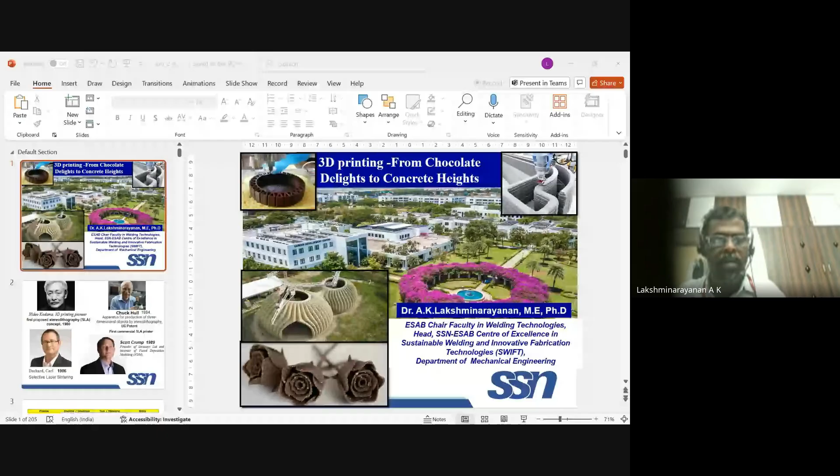Is it visible to you? Or are the slides visible to you? Yes, sir. One second. Is it moving? Are you able to see my slide moving? No sir, it's not moving. One second, I'll just check. See, slide 1. One second, I will just stop sharing it.

Is it moving now? Yes, sir. Thank you.

Though the topic given to me is metal printing, since I am covering another session, before that introduction session, I would like to share an overview.

This general overview includes the 7 different processes of additive manufacturing. This is our campus, SSN College of Engineering. Currently, I am the chair faculty in welding technology, sponsored by ESAB India Limited. I am also heading the center, which was established recently with funding from SSN and ESAB, called Center of Excellence in Sustainable Welding and Innovative Fabrication Technology. So currently I'm heading the center.

We are doing a lot of work with respect to conventional welding processes, process development and consumable development, as well as wire arc additive manufacturing, especially twin wire additive manufacturing, with support from ESAB India Limited, as well as through two different DRDO projects. Maybe in the next session I will share that.

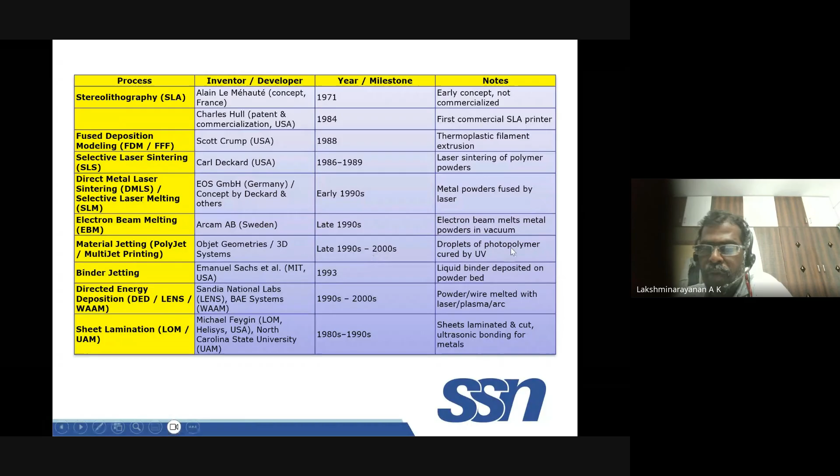Then the process called material jetting was established from the 1990s to 2000, where photopolymers were cured by UV. That is one of the developments. Then binder jetting, in 1993, by researchers from MIT, where liquid binder is poured onto the powder bed to act as a binder.

Later, this process became widely used for metal deposition or metal component fabrication, called directed energy deposition. We are also using one of these processes, WAAM, what we call wire arc additive manufacturing, where either powder or wires are melted and used for deposition. Finally, there is one more process, what we call sheet lamination.

Sheet lamination was also proposed during the 1980s to 1990, but did not come into effect until after 2000. Especially we did some work on laser lamination, which we will see when I cover laser lamination and friction stir additive manufacturing in the next session, probably on the 28th.

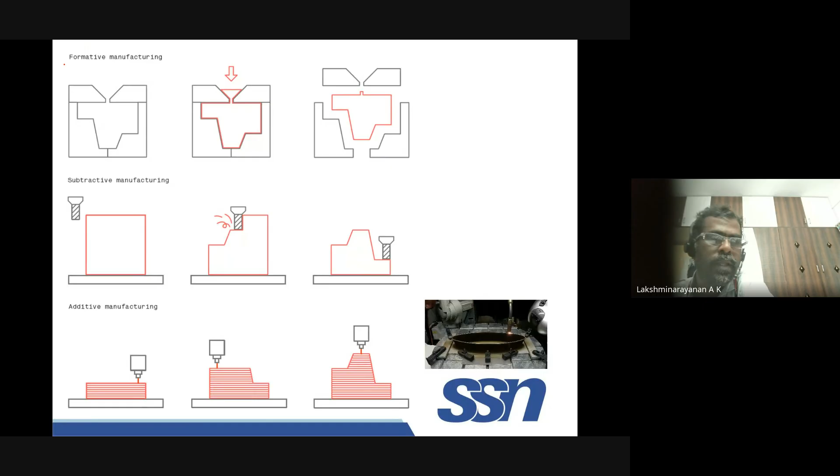Formative is nothing but metal forming operations where you have to prepare a die of the desired shape. Initially the material we have is a billet. Take a billet of certain dimensions, keep it over the die, and apply force from the top. It will go through this process and occupy the position of the die, the space between the die, and finally you get this shape. This is what we call secondary processed material.

Usually any material is fabricated through casting. Casting is the approach through which any primary material is fabricated. So formative is nothing but metal forming operations, a secondary process mostly done to achieve better properties.

Now, if you want to change the dimensions of the product, again you need to prepare the die. That is one of the costly things—the die is one of the costly aspects we suffer in formative manufacturing. Even now, some companies in India—I visited Super Auto Forge—fabricate these dies using additive manufacturing, especially laser-based additive manufacturing, to reduce cost as well as increase the life of the die. They use formative manufacturing for this.

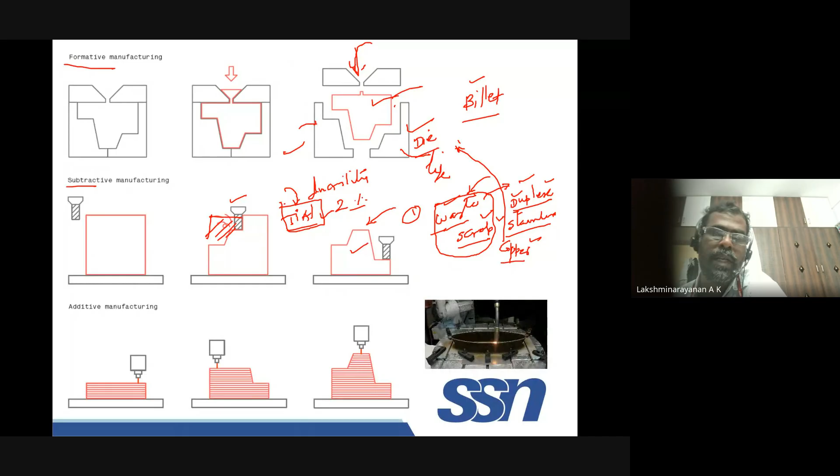So it is not easy to deform, then it is not easy to machine also, because the ductility is very less. For both cases, whether you want to machine, remove certain material, or deform the material, since the ductility is very less, these two are not possible.

So naturally, what we have to do is look for an alternate process. So the alternate process is additive manufacturing.

The other aspect, when you have a very thin section, making from casting further, you have to cut it from the bulk casting, then use secondary processes like rolling, progressive rolling, and finally you end up with a thin sheet. So these difficulties can be overcome by using additive manufacturing.

But remember, additive manufacturing is not the solution for everything. Whenever the need arises, whenever there is a problem with conventional technique, then you can use additive manufacturing. That always you have to keep in mind. Sometimes people doing research on additive manufacturing claim that everything can be done in additive. But even then, you have to see feasibility.

So additive manufacturing is the technique. We'll see more detail. The same thing, what I will do with this sample - from the top you see a square like this at the bottom. So what I will do is try to do a CAD model.

Maybe I will go with the slide and tell you. I will have a 3D model, then I will try to slice that into different layers. Say for example, I will have a first layer, second layer, third layer, fourth layer, fifth layer. Like that, I will just slice this. So if I slice that, I will have one plane here like this.

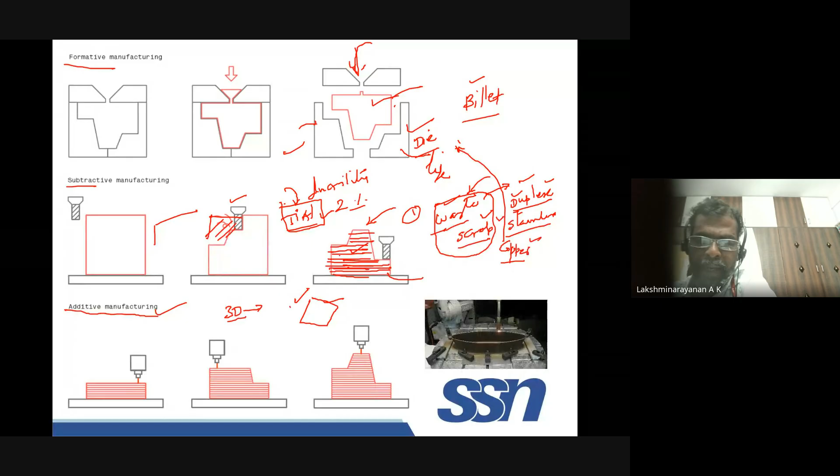Above that, there is another plane, another plane, another plane. So now I slice this three-dimensional object into two-dimensional. Actually this whole process I will do as a single step. For understanding, I'm telling you, slicing is nothing but making this 3D object into a 2D plane.

Then you just split this, make this also, then try to have the coordinates of the particular plane - especially I'm talking about the first layer. It looks like this. When I go here, only this part, right? I will have only this part. When I go here, I will have only this, right?

So I will just slice it, get the coordinates. Finally what I have is the coordinates of everything, each plane, each coordinate. Similarly, multiple layers, multiple planes. Finally what I get is a file called G-code.

This code, you can run using a robot. We have a robot in our center, or we can also use a CNC machine. We also have that. So both machines can be used for depositing material.

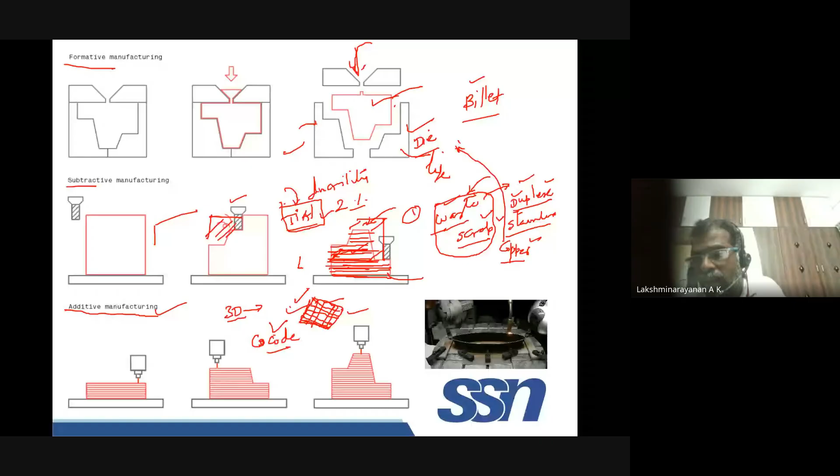I'm not going to cover mostly metal today. I will cover whatever explanation is given, and wherever possible I will bring material into the picture. Mostly I will cover what techniques are available, and when we have to use which technique. That is the idea of this session.

Maybe for the newcomer, or anyone fresh who wants to start with additive - just whatever you are seeing in the video is machining, right? Wait a minute, I will just...

So this is also excess material that can be removed, right? I don't want to play this and take too much of your time because I need to cover other topics. So first, this difference you can see in this picture, where subtractive manufacturing or machining or metal cutting starts with a block of metal, where I will remove certain material to create features.

When I want to have a thread, I can make it, or when I want to make a hole here, onto the surface, I can make it. So I just remove the material, and you see there is a lot of waste material coming out that needs to be taken care of, until the desired part comes out, and you end up with the final product like this.

Whereas additive manufacturing starts with nothing. You have only a substrate plate, or even for polymers where you don't want anything, you just have a build platform that is not a consumable. You just take that platform and start building layer by layer, gradually adding layer by layer. I have a few more slides which will make this very clear, gradually adding layer by layer until you have the desired product.

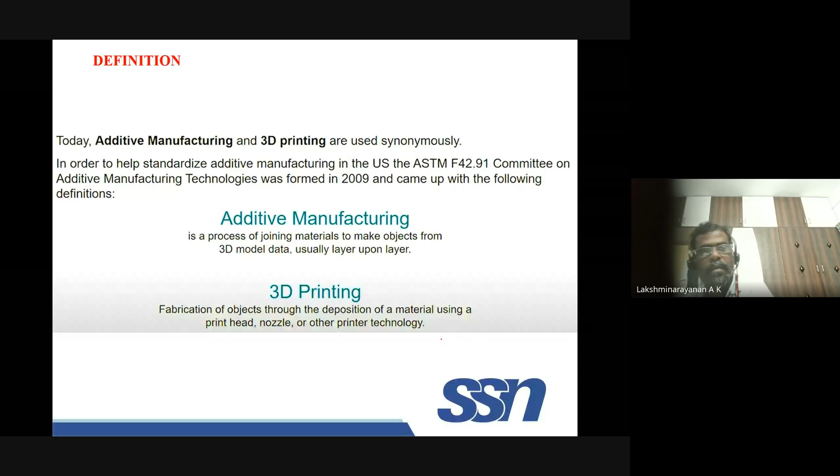So wherever possible, I will give some ideas to extend your research also, probably in the next session. Before going to that, let's look at two different terms which are used interchangeably by many of us: one is additive manufacturing, the other is 3D printing.

So for this topic, whatever I am presenting, in some places I use additive manufacturing, but 3D printing is a very colloquial term people use. Technically, from the industry or manufacturing process point of view, additive manufacturing is the proper term we have to use, because it compares with conventional processes like subtractive manufacturing or formative manufacturing.

This is the definition given by the committee ASTM F42 91 during the year 2009. They defined additive manufacturing as a process of joining materials to make a component from 3D model data, usually layer by layer.

This holds good for 3D printing also, but 3D printing is a very general term which covers many processes, for example fabrication of an object through deposition of material using a print head, nozzle, or other printer technology. So that's a very general term, but additive manufacturing is the more technical term which we may use.

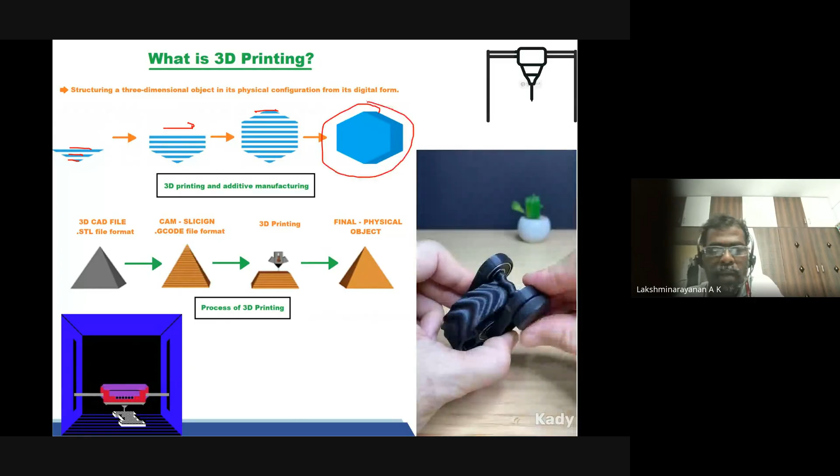As I mentioned already, it takes digital input in the form of a CAD model to create a three-dimensional part layer by layer. We will see where we have to get this from. Once you have the 3D model, once you have the G code, the process is like this: deposit layer by layer. These are the in-between steps you have, and finally what you need is the data, the G code.

You can also visualize the features of FDM—maybe I will cover that. I have a few more videos for you just to understand the capability of 3D printing. So initially we need to have a 3D model.

Then you just do slicing—maybe there is a spelling mistake there. You will end up with the G code format, and then you do 3D printing. Once the G code is ready, just transfer it to the machine through Wi-Fi or through a memory card, and then you have to do certain settings, such as whether you want support, what shape of filling, whether you want 100% fill or 50% fill, things like that. Then you do the settings and run the 3D printer. Finally you will get a finished project.

Those who are at the initial stage, I recommend you go buy a 3D printer. An FDM printer for polymers will cost only around 20,000 rupees. We spend a lot of money even for phones, so it will cost only 20,000 rupees, and you can buy one and learn by making plenty of models, which I'm going to show now.

So what we need initially is a 3D model. How can you get a 3D model? If you're starting with it as a hobby, you can explore the website Thingiverse, where you can get models—whatever model you type in, you will find very beautiful models that people have already made.

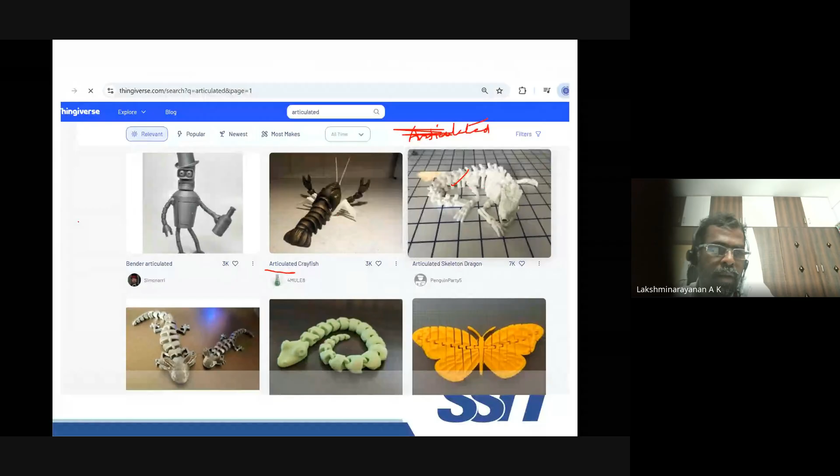Suppose I want to make an element chain, like a chain. What I have to do conventionally, if I want to do manufacturing as metal or plastic - take a metal. If I want to make a chain of stainless steel, I have to take a bulk material, extrude it, and make it into a very thin section of wire.

Then from the wire I have to do some metal forming to bend it, then I have to do some welding. That is how usually, if you want to fabricate a chain, you can do that. But in 3D printing, if you use this feature, this consists of a lot of links, and that link can be directly printed without any problem.

All this I have done a lot of work on - even in front of me I have two 3D printers at my home, which I bought for a hobby. So this kind of link, if you want to generate, what we call it is print in place. I will show you some videos for that - print in place. Directly you can print if you have this.

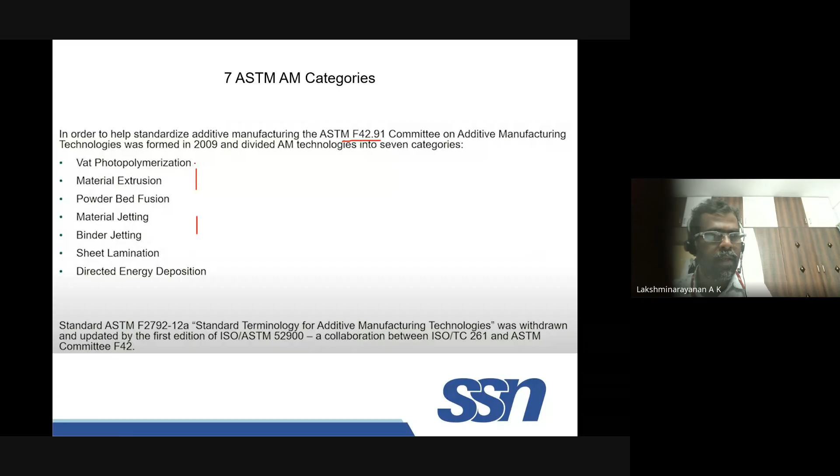Number 1 is Vat photopolymerization, which is a resin based printer. Material extrusion is basically where you can use wires or pellets, even paste that can be extruded through a nozzle. Then powder bed fusion is very popular, which uses powder and tries to melt it with a laser source or electron beam source. That is one process, and you can use this for metal.

Material jetting is also one of the processes, where material in the form of droplets comes out from the nozzle. That is one process. Binder jetting is where you use binder particles.

You have a lot of powders where the powder binder will be sprayed in between to create bonding.

Sheet lamination is nothing but taking different sheets, instead of powder or wire, and trying to bond them, because when you use powder or wire, it takes a lot of time to deposit.

Directed energy deposition - I will go deeper when I show a video. Directed energy deposition is nothing but using a laser source, or electron beam, or an arc. I will cover arc processes in the next session. What I do is place the wire in the arc column, laser beam, or electron beam and try to melt it, then deposit onto the substrate. It may be wire, or coaxially I can feed the powder to deposit. This is called directed energy deposition.

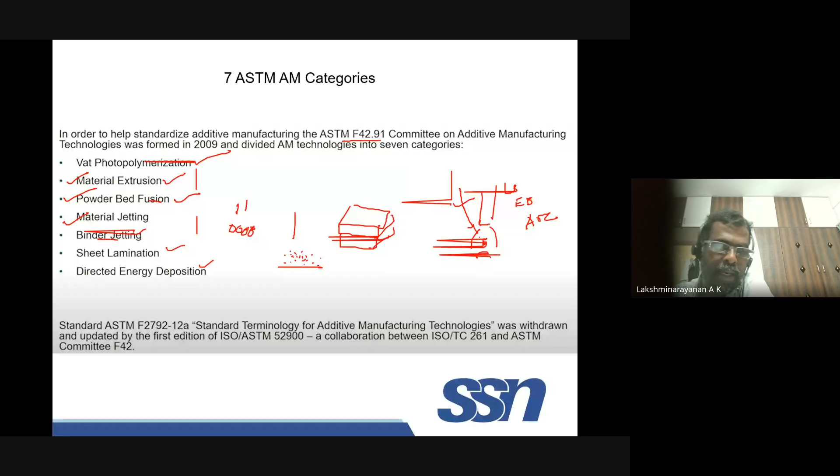Why is it called directed energy? Because in powder bed fusion, you keep the powders at the bottom to build a flat form, just using laser to melt. Whereas in directed energy deposition, you are directly feeding the raw material into the heat source. That is why it is named so.

So if you see the 7 categories, there are still a lot of subclasses. For example, in Vat photopolymerization, you have SLA, stereolithography, where you use a laser.

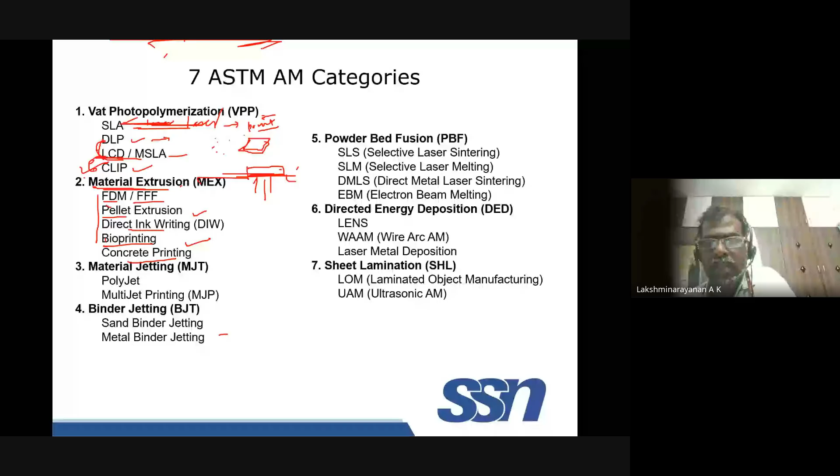Laminated object manufacturing just uses adhesives to stack layers to achieve the component. That is LOM. Ultrasonic is used for very thin sections - same concept, take sheets, use ultrasonic transducers to create vibration so friction is generated and used for bonding. One method missed here is friction stir additive manufacturing, which we worked on in our center, studying creep.

So this is the first material, extrusion. Each category has certain characteristics we call resolution. Resolution is basically that after deposition, if you expect the surface to look a certain way, it won't be exactly like that - you will always have some variation. So this resolution is very important.

In case of material extrusion, you will achieve 100 to 400 microns resolution based on the nozzle diameter. So this is low cost.

Maybe I will just play this video. So it's like a hot glue gun - it will just deposit. Basically it is low cost, and it works well with thermoplastics, composites, concrete, and biomaterials.

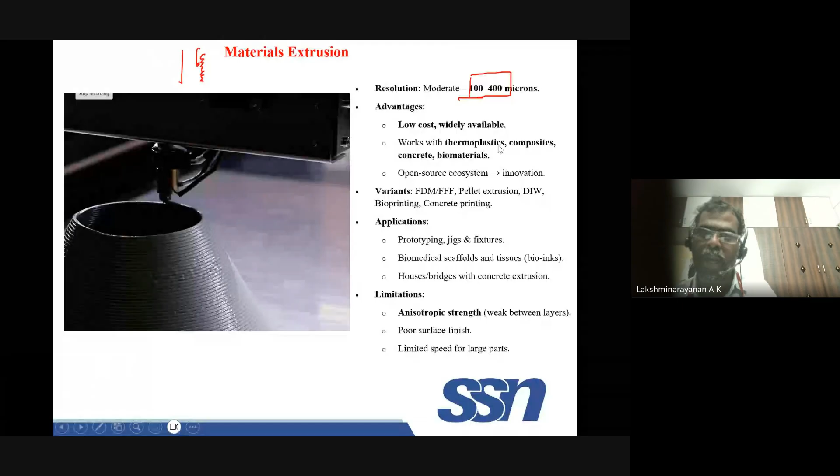A lot of open source systems are available. You can develop your own system, because basically all these 3D printers used for plastics use either Marlin software or Cura. There is software called Cura, and Marlin is open access - you can just download it and create your own systems.

I'll stop this video. So if you see the variants I already shared with you - application prototyping, if you want to do some projects or develop prototypes, you can do it using this process. There are many biomedical applications; even tissue manufacturing, people are trying, though it's not commercially available - at research level they have gone to a certain extent.

The only issue is that whatever material you deposit has anisotropy with respect to the build direction, so the properties may be different. The surface finish depends on the nozzle diameter - conventional polymer printers mostly use 0.4 mm, so the surface finish is not as good compared to the SLA process.

So for larger parts, larger speed is difficult to achieve. Nowadays, with Cura software and some modified versions available, printers are going for higher speeds.

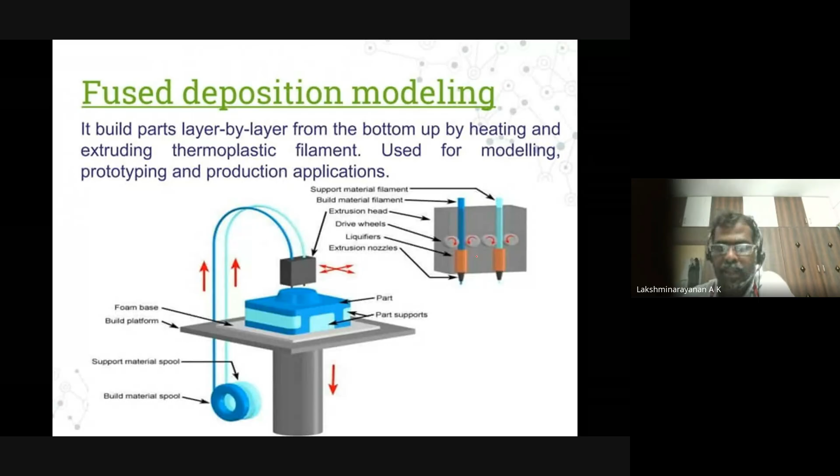So this is one of the methods, fused deposition modeling. You can have a single head or multi head. You can just pass the wire and deposit based on the technique I described - you start with a single layer.

Two things you can notice here are the movements. Most of the time the Z axis is controlled in the nozzle - the nozzle will move only in this direction or that direction, whereas the bed can move in both directions. In conventional printers, plastic or polymer printers, the nozzle will go up and down too. Usually the Y axis moves the bed, while the nozzle's X and Z axes are controlled.

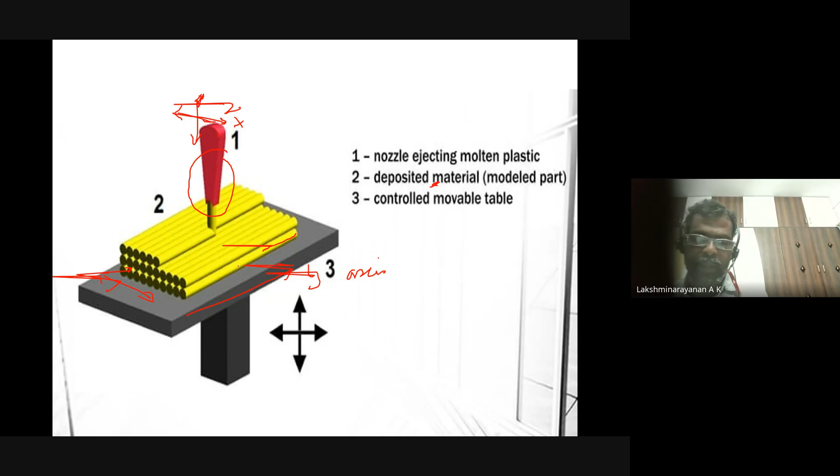So basically, if your first layer consists of this rectangle, it will deposit like this - you can see some gap is there, which will affect the structure. So you can see what are the possible ways, possible models you can print.

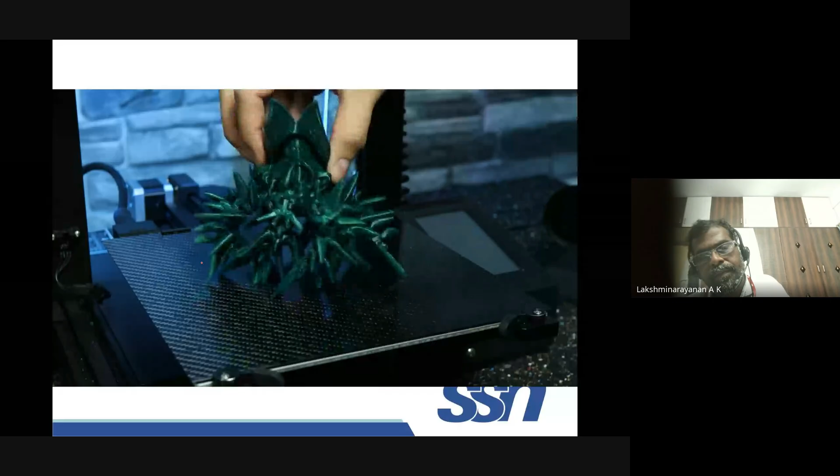So they print in place. Sometimes you can print and assemble also, like what is being shown here. Depending upon the size, the time will be different - you can imagine the ways by which you can print it. Here the body and limbs are printed separately, then they will assemble. That is also possible - accordingly, you have to design.

Even these models are available in open source - you can just download them. According to your printer settings, you have to modify the setup and just print it.

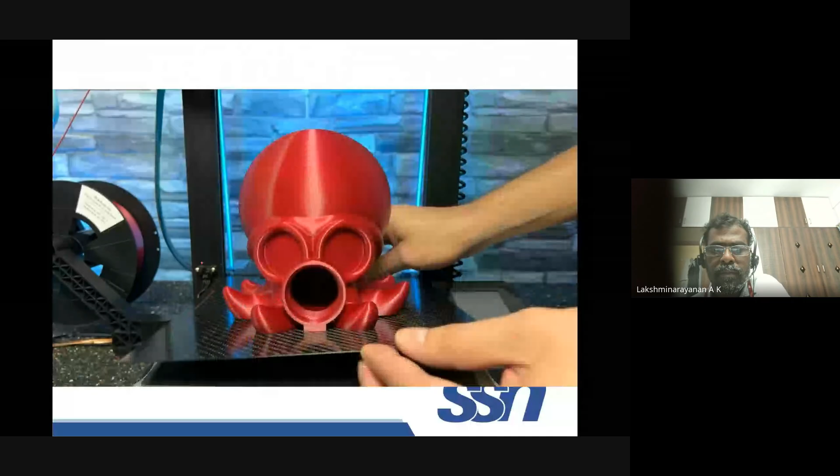So with multiple heads, it is still possible to print. You can just print with multiple heads. See how nicely the horizontal hole comes out with even threads - nowadays modeling threads and such is easy. This way you can get multiple colors if you want, or you need not have multiple headers - instead print with different dimensions.

You change the wires and then assemble it.

So all are link-based. You can do a lot of butterfly or whatever. Even for our prototyping, you can just do that.

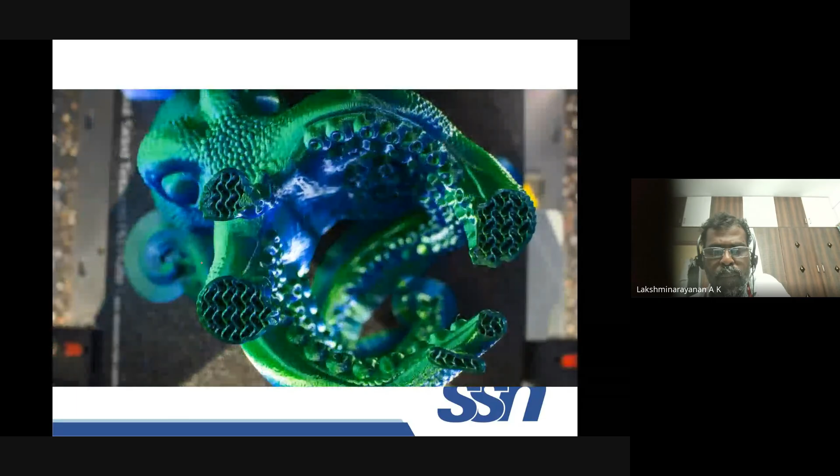So these are some of the models just for the capability. I just want to show the capability.

Sometimes you need to do post processing, like polishing it. You can give different colors also through painting.

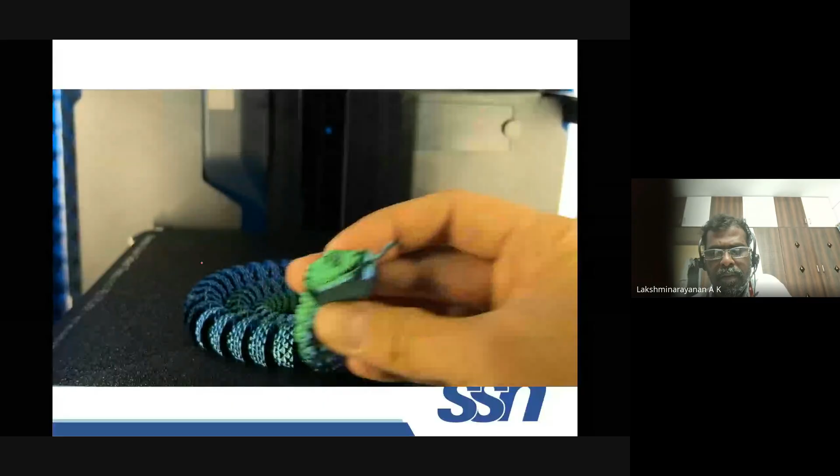Right, so that is regarding FDM. I witnessed, I hope different components can be done by using a wire.

Then this process is a resin-based process where you just cure the resin. You have a building plate with resin filled in, from the bottom. Either it is an LCD screen, DLP printer or CLIP, all use the same concept. There is only a certain difference among them. So you have a build plate where at the bottom you have resin.

Through the lens, I will send the UV light so that the first layer cures. I will maintain a gap, this initial gap is what we call layer thickness. So once I keep this plate at the bottom, initially I will keep a certain layer thickness, then I will cure this.

One layer is over, for the next layer just move the platform up. Then the next layer, you can see the second layer cured. Like that it will go.

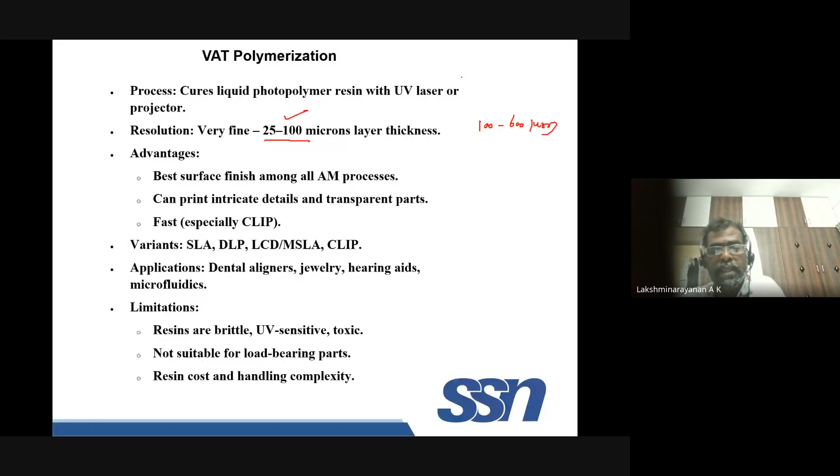But a few points, only very fine microns. As I mentioned, FDM starts from 100 to maybe 600 microns, whereas here the resolution is better because it is based on resin. That means resolution is fine, meaning you will have very small features in your product. That is the advantage of this process.

You can see it has the best surface finish. It will provide the best surface among all AM processes. You can have very intricate details, transparent parts you can make, and it is very very fast, especially the last one, CLIP, because there is a special technique.

You have a lot of applications which I will cover very soon. So these are the trade names for that, which we already discussed.

Basically these three are very common: SLA, DLP. Recently CLIP is also one of the processes. Only the source is different.

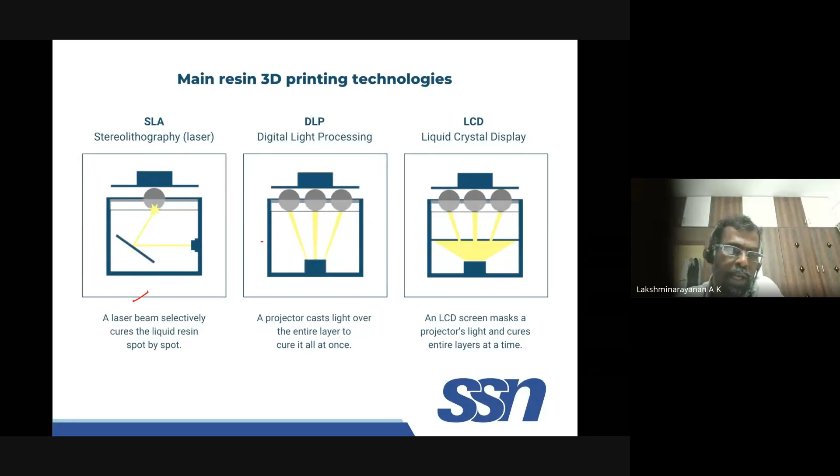If you see the first one, here we use laser that selectively cures the resin. It will take a lot of time. That is why this comes into picture, where the entire layer is being cured all at once. Laser LCD helps us to control the system better, and hence you will make it slightly faster than DLP.

So these are the systems available in the market. Basically different manufacturers are there. Anycubic or Elegoo or Prusa. Creality is also very popular.

The cost - earlier they had a version LH or LD002. Now there is a system called Halot. You can buy it for 16,000 rupees or 17,000 rupees. So basically the concept is very simple.

You have to prepare the resin. You have to just pour it in the container, what we call the vat. That is why it is called vat polymerization, the process name itself is vat in general. This container, the vat, you have to pour it, then bring it to the first layer, cure it from the bottom. The source may be different - maybe you have a laser source or LCD or whatever source you use.

The same concept is there. Before going to the video, let me share two things. There are two ways you can deposit material or build your component. Whatever I showed up to now is this system, where your build platform is initially at the top.

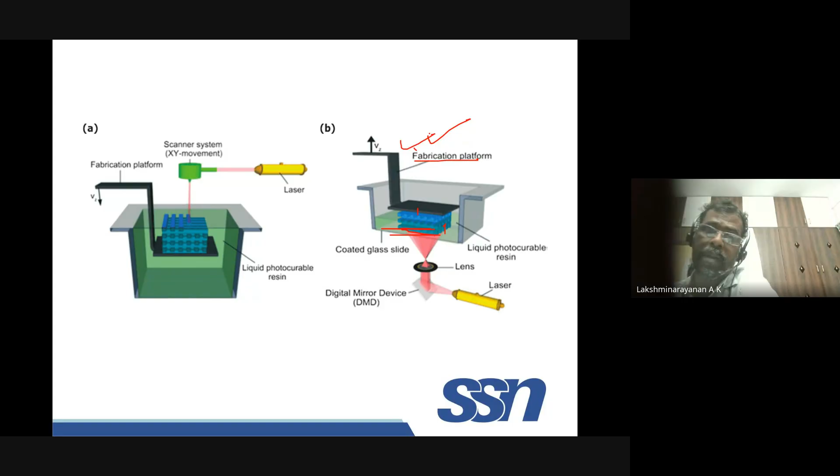There is another system also. Here the build platform is at the top. You pour the resin so that the space from the top to the build platform matches the layer thickness. Initially, from the top, you start curing. The first layer is cured, then it goes inside. After that, it moves down with respect to the layer thickness, and the next layer, third layer, fourth layer comes. So it will be immersed continuously in the resin, and finally it will be taken out.

Okay, this is one method. So either you can go bottom-up or top-down. But basically, most commercially available machines use this approach. Both systems are there, so let me just play this video.

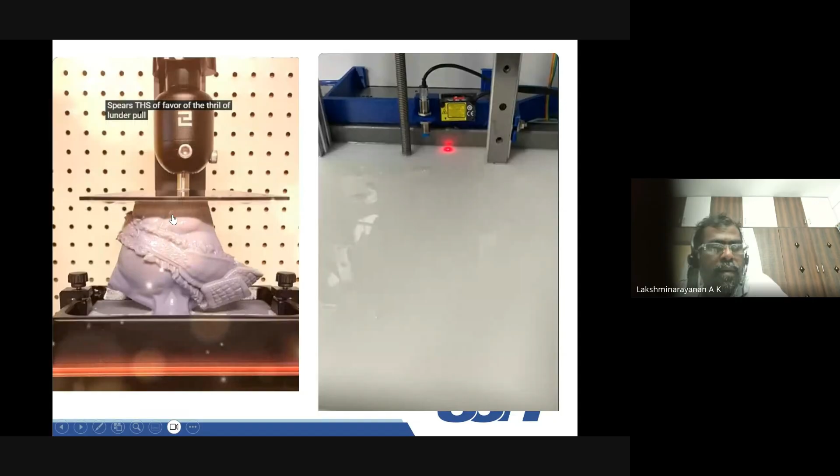You can see the very fine feature and surface finish of the component. That is much better compared with FDM. So let me show this also.

This is from the top.

The next process we will see is selective laser sintering, which usually uses a CO2 laser to fuse small particles - it may be plastic, metal, ceramic, or glass powder, whatever it may be. So you have to spread the powder and try to melt it with respect to your model and according to the coordinates.

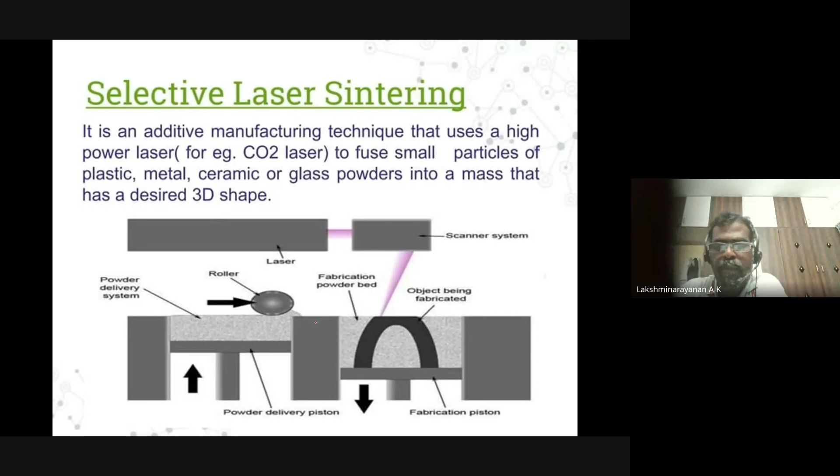Then your first layer is formed, and the fabrication piston will go down. Let me get a better picture to show you very soon - this is how it works. So powder leveling will be done first, then laser melting, then your platform will go down. Let me show one more slide for a better picturization.

Usually laser or e-beam, meaning electron beam, works layer by layer. The resolution here is 20 to 100 microns. This is another advantage - the biggest advantage is you can have a fully dense component, very strong. That is also one of the advantages of laser sintering. Metal, polymer, ceramic - you can do all variants.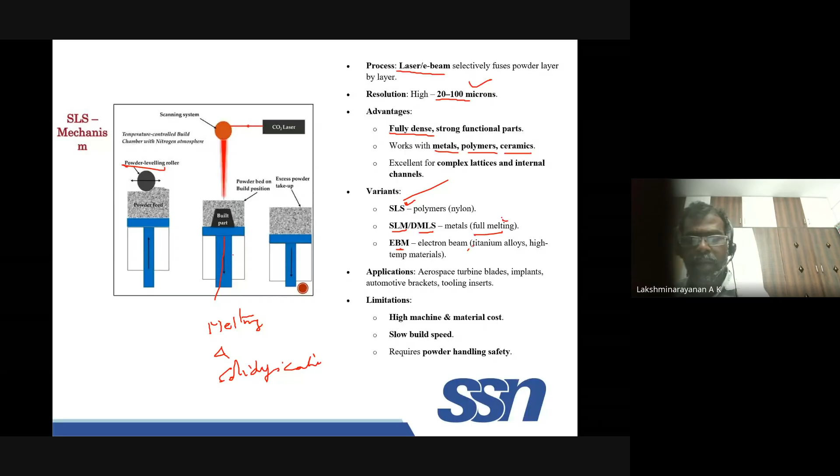You have SLS, SLM, DMLS - all concepts are the same, but we have to understand. I don't know why they call it sintering, and there is no real explanation for that, since all these processes, whether plastic or metal, involve melting. So there is always melting and solidification. Whether you call it direct metal laser sintering, where metal is being melted - as I mentioned, it's full melting. Electron beam melting is very popular, especially for reactive materials. I will cover that in the next lecture.

Just try to understand this is how the actual component is made. I will show one video. There are three chambers - one chamber where we will fill the powder first, and the next chamber is the working chamber.

The other chamber, whatever you see here, I can just mark: this is 1, this is 2, and this is 3.

Initially, powder leveling is the first step, where this platform slowly goes down. Initially it will be at the bottom, completely filled. When it comes up, there will be excess powder above this level, where the roller will come and fill here. Initially it will be at the top. Maybe we give one layer thickness space, so powder will be deposited or spread by this roller.

Whatever excess powder is available here, because it is going up, that will be spread over here. For one layer thickness, you do laser melting on that particular layer. Whatever excess material remains once melting is over, it will be moved here. Because it is getting filled with excess material, this will go up, this will go down, this will also go down. It collects the excess powder, where this is a working chamber.

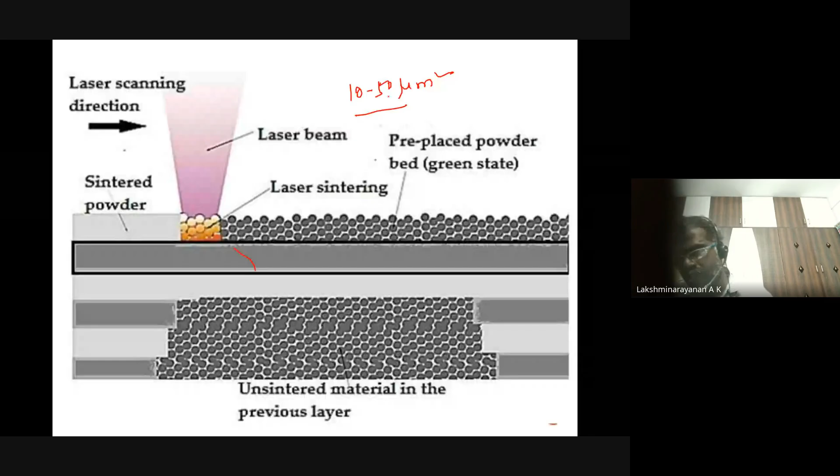Whatever unmelted powder or unsintered material of the previous layer, that will be collected in the collection chamber, then it can be reused.

I'll just play this video so you can have some idea how it works. This is powder layering, then laser is being done, it goes down again, the platform will come up, spread the powder, laser melting is there. This process will continue. Finally, you will end up with this component.

Maybe I will do one more video. That is the schematic animation, and this is a real one showing how it works. This is also another advantage: on a single same platform, you can go for multiple products of multiple dimensions. Maybe I will play it again. So that is also another advantage.

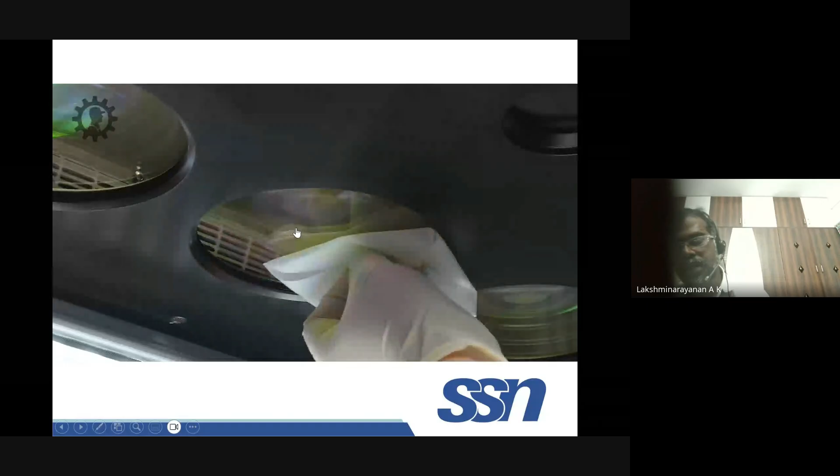It's not like other processes where constructing different geometries is difficult. With SLA you can do that, but with FDM it is difficult. Here, not only in a single layer, you can stack layers, and in between you can have space. The powder itself will give support, and you can make components across multiple layers. For example, I can make a component for the first 100 mm, then have a gap of 50 mm, then make another component for another 100 mm. Like that I can do it, right?

So this is SLS. One video is there. I will show it, but before that I have another video I will show.

This is material jetting, that is the next process. Material jetting is very much similar to what we have in printers, right, inkjet printers. Similar to that, you have a head where a jet of particles, photopolymers, is forced to come out and deposited onto the build platform.

The interesting thing here is the resolution is 16 to 32 microns. You will have very good surface finish, and multicolor, multi-material, even transparent outputs are possible, these are advantages of the system. Dimensional accuracy is excellent, but whatever material you produce is not so strong, that is one limitation. It is being used for preparing models for demonstration and prototypes, for realistic look and feel, for those applications usually they do that.

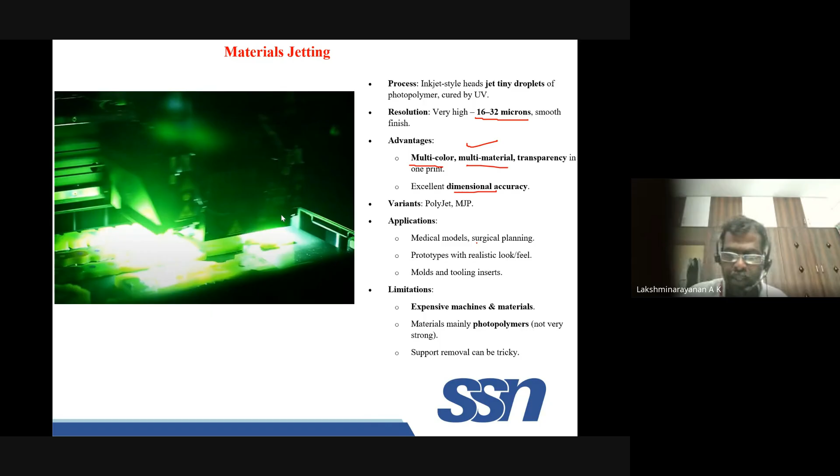This is also, I hope, a video, it will play. It's like an inkjet printer, you can see how it works. The process works there with a small animation. Just a droplet, once the droplet comes out, it is cured by a UV light.

So this is binder jetting. Again, the resolution given is 50 to 300 microns. Large build volume is possible. That is one thing. Only thing is, it's like a powder metallurgy route where you can just prepare a green compact, which is not so strong. You need additional sintering—whenever you do a green compact in powder metallurgy, usually you need to go for sintering. So this will help us understand the process.

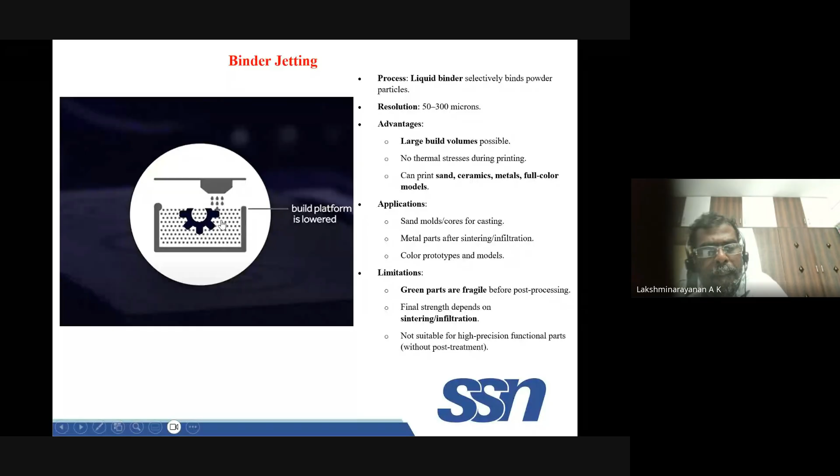But only thing is you need a secondary process. Again, you need to do sintering. This is only like a green compact.

So this is directed energy deposition. Slightly different—so far we talked about microns, but here the resolution is in the range of 0.5 to 2 mm, that means 500 to 2000 microns. That is one of the drawbacks of directed energy deposition.

But fortunately, this is very useful for metal 3D printing. You can go for repair work also. If you have some parts with cracks, you need not throw them out. Instead, you can just remove certain material from the crack and deposit new material, so that expensive parts can still be used in applications.

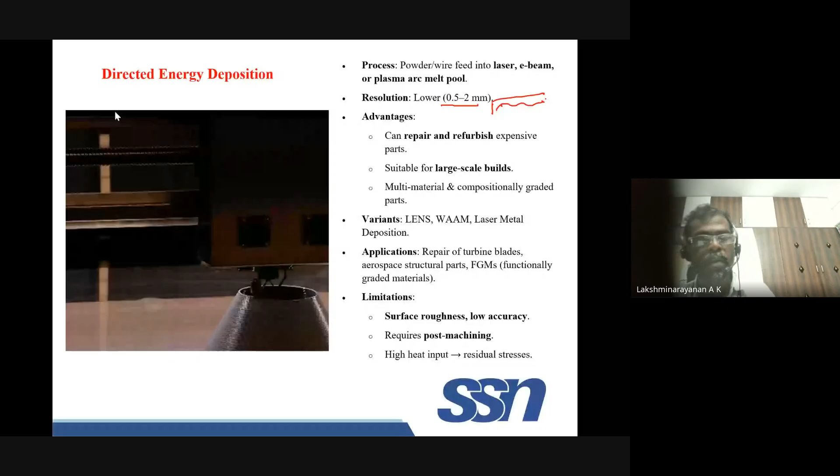The other advantage over other processes: large volume deposition is possible using directed energy deposition. Also multi-material, compositionally graded parts, which we are concentrating on more in our center. Maybe I will cover that when I show the videos from our lab in the next session.

So the trade name for powder bed fusion, as I mentioned earlier, whether it is a polymer or metal—in all these cases, the scenario is melting and solidification, not sintering. People have used that term maybe for different trade names, but the actual scientific thing to understand is that it is melting and solidification, not sintering.

Same thing, one video—the same thing we already discussed, just to refresh.

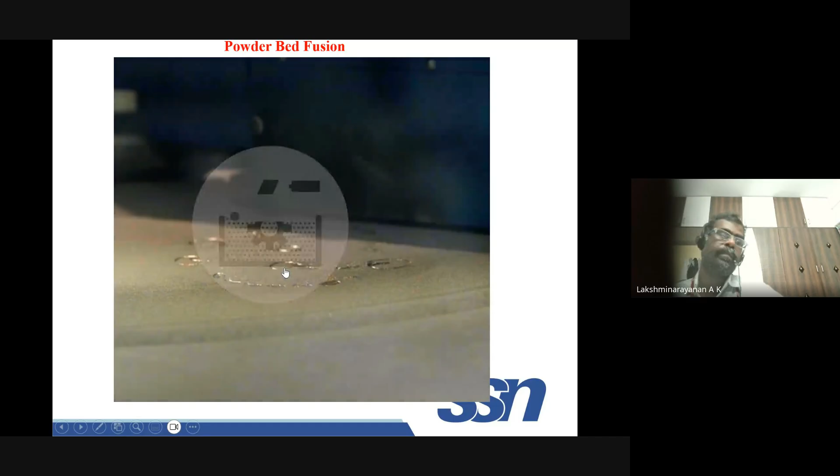Yeah, this is powder. So to summarize, we have 7 processes already discussed. Vat polymerization uses liquid photopolymer cured by UV. You have different variants of that: SLA, DLP, digital light processing or LCD, and CLIP—continuous liquid interface production.

Applications include dental, jewelry, and prototypes. This is available online, you can go through that. Material extrusion again, we already discussed—you can check the application of prototyping.

Material jetting is for multicolor models and dental molds. Binder jetting is for metal parts—you can go for post-sintering, as I mentioned, and large prototypes are also possible. This is very commonly used for processes 1, 2, 3, and 4 for metals. I'll cover some of them in the next lecture.

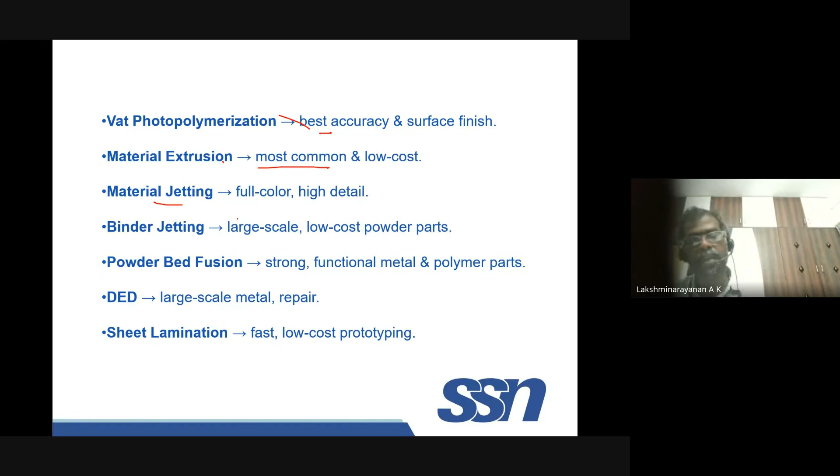Just to compare: vat photopolymerization has best accuracy and surface finish. Material extrusion is most common and lower cost. Material jetting allows multicolor printing, like color printers. Binder jetting uses low cost powders and is good for large scale. Powder bed fusion gives strong, functional metal and polymer parts. DED allows direct and large volume deposition, and if you want repair work, you can still use that—one of its advantages.

Sheet lamination is fast and low cost for prototyping, especially for large dimensional models. If it's a regular shape, there's no need to waste time depositing using powder or wires—instead you directly take a block and bond it using a hybrid additive and subtractive process, which I will cover in a later session.

So with that, we covered the processes. Quickly, we will look at other applications.

This one is chocolate—we are also fabricating chocolate prints in our lab, and maybe within this month we'll complete that. You can print to celebrate your birthday or for friends, modeling whatever dimensions you want—even print your face with chocolate. Lots of videos are there, you can search and learn.

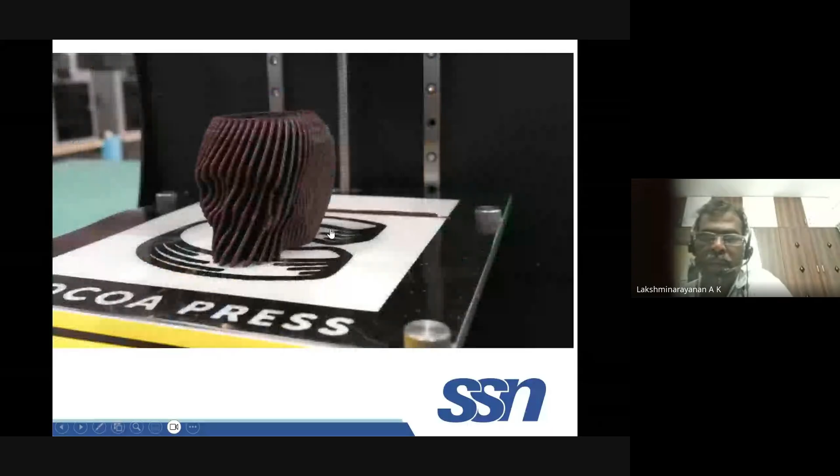Now that is why my topic started with chocolate delights. Even food for elderly people—I will show one slide where easy-to-chew foods can be 3D printed. But whatever material you use for extrusion must meet food regulation standards. This is one interesting thing to understand.

Now you can print your home very quickly—not like the usual years it takes to build a home. With the advent of 3D printing, they are able to build much faster than usual house construction. This also comes under material extrusion.

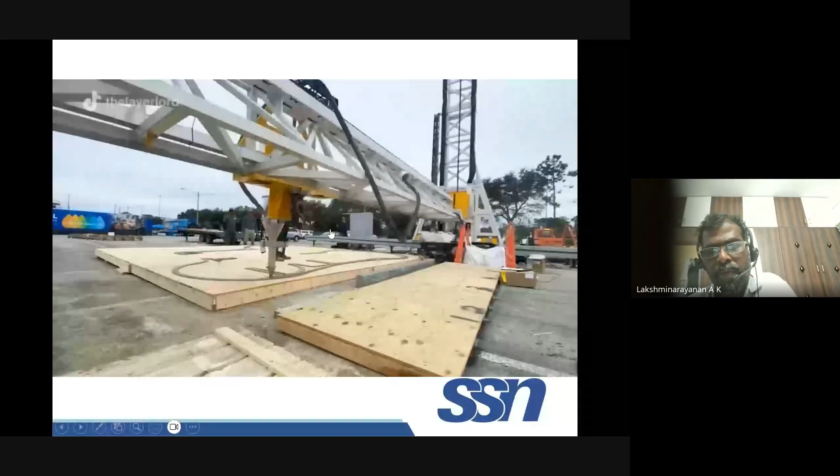The quality and strength are very good compared to conventional construction processes. Whatever shape you want to create, including curvature, it's not difficult to build. That's why I took these two topics for the slide title—building from chocolate to concrete heights, you can do that.

Nowadays, a lot of dental applications exist where everyone has their own sizes and geometry that can be easily 3D printed. You cannot wait several days to modify or fit new things—you can easily 3D print and deposit. Ongoing research includes bioprinting of teeth and gums, dental aligners, and Invisalign, all printed according to each person's shape and geometry. This is a very useful tool for dental applications.

You can also use implants—titanium implants, dental orthodontic wires, surgical plates—all can be printed now, whether metal, polymer, or alloy. Titanium is difficult because its ductility is very low, being an HCP (hexagonal close-packed) structure. Materials with HCP structure always have low ductility, making them very difficult to form by conventional metal forming. That's why titanium screws are much costlier than stainless steel screws—for a tooth implant, titanium may cost around 15,000 to 20,000, whereas stainless steel is much lower.

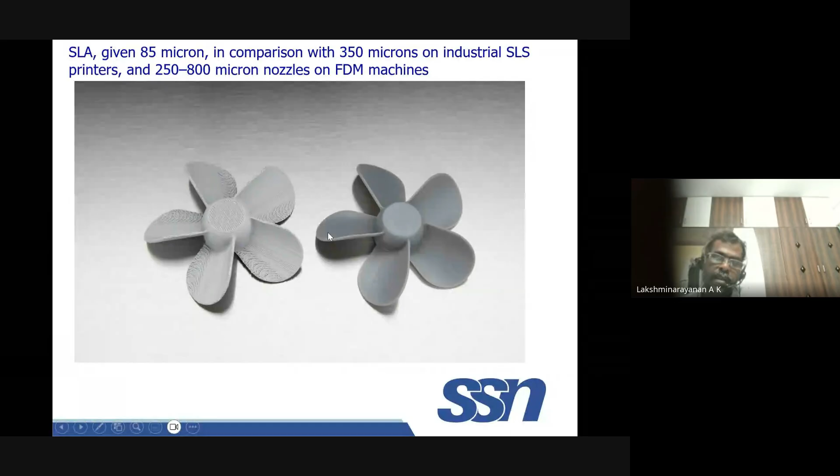If you look at SLA, stereolithography, and SLS, the surface finish is much better compared to other processes. Since you use a wire and nozzle of 0.4mm, usually 250 to 800 micron nozzles, your surface finish won't look as good as SLA or industrial SLS processes. Still, you can control this with post-processing, but directly near-net manufactured components are better, avoiding post-build operations.

Right now it's used for cardiac surgery and patient-specific heart models. Neurosurgery rehearsals are also being carried out now, even facial bone reconstruction for patient-specific cases, since jaw shapes differ for different people. They use 3D scanning to model it and proceed from there.

While I told you about the models—one way you can take it from the internet. The second way, you can model it on your own. The third way, if you already have a three-dimensional object, do laser scanning to get the model, then reverse engineer it. Again, you slice it and get the coordinates. These three ways you can use to get a 3D model, which can then be used for these applications.

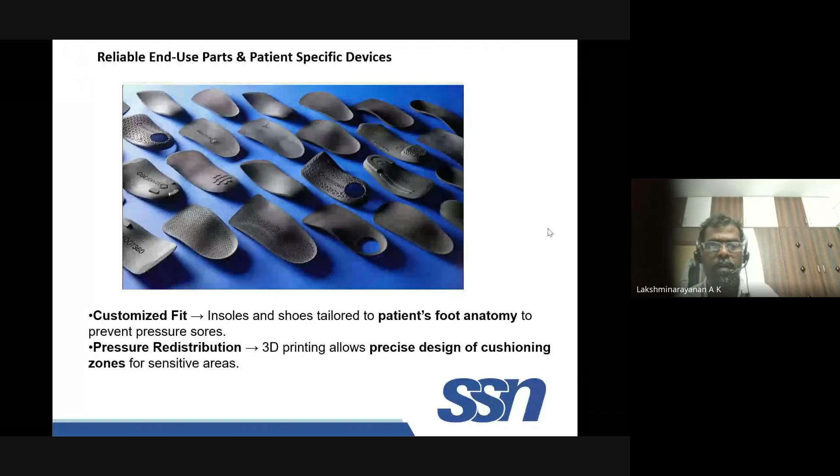Using Blender, it will take some time to learn the software. That is the only software I know, I'm telling you - just use Blender and try to learn that. There are a lot of tutorials available.

Another skill you need to learn is painting. For these creatures, if you create them, you need to go for micro level painting. There are kits available but they are costly - that's why I still have my own thing in white color, I need to paint it. These are some interesting things, if you are a hobbyist you can try that.

Gold and jewelry manufacturing conventionally is restricted to the ideas of the person doing it - very complex shapes cannot be done. Traditionally it's very difficult with conventional methods. Complex geometry can be done using 3D printing, especially for small batches.

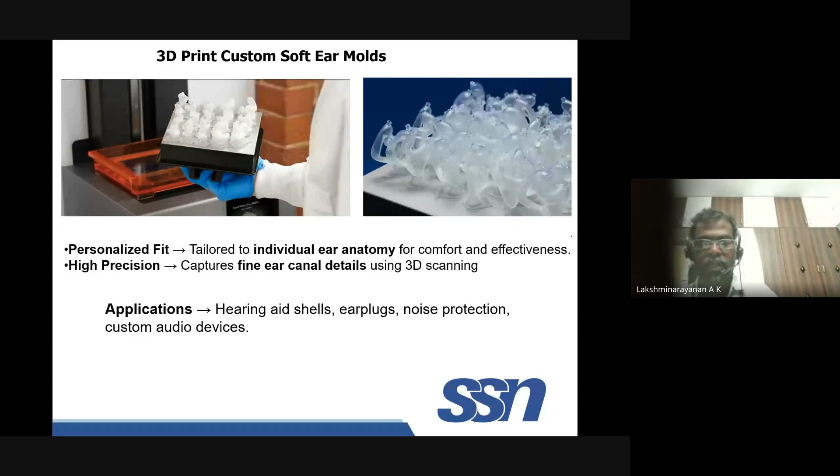Soft ear molds - this is one problem. Any student, even us, we always put on headsets with ear pads, and it applies pressure on the ear. Anatomy differs for each individual, so you just measure it accordingly and create the mold, and each one can use these hearing aid shells that help protect our ear since we are continuously using it.

You can create your own drones. If you want to develop drones and some product gets damaged, you can directly print it - even propellers and blades. Most of the time when the drone falls down it will break, so my students usually print it, do the assembly, and reuse it.

Recent days, bioprinting with living cells - bioprinters for human organs - they are doing a lot of research, especially to print stents, since once you have capillary and blood vessel problems that's hard. Some are working on even modifying part of the human liver just by bioprinting. Cell level printing is now coming up, though not at a very big commercial level.

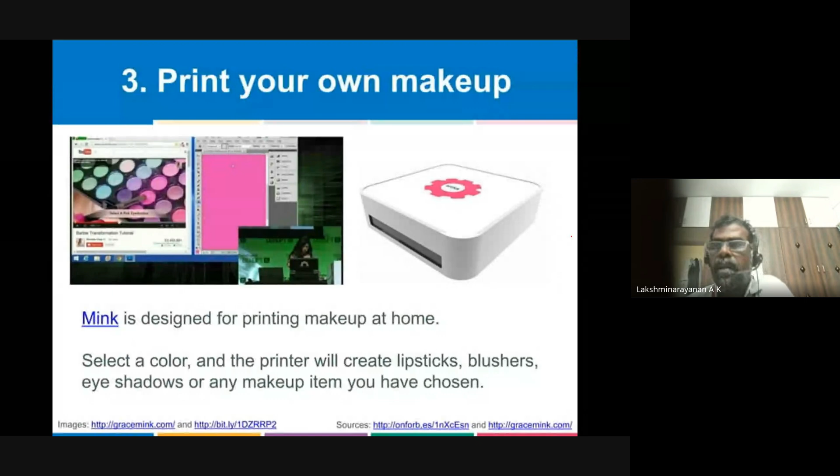As I mentioned earlier, people who are not able to chew have a chewing problem. There is a company, Smooth Food, that uses 3D printing technology to turn fresh ingredients into chewable meals.

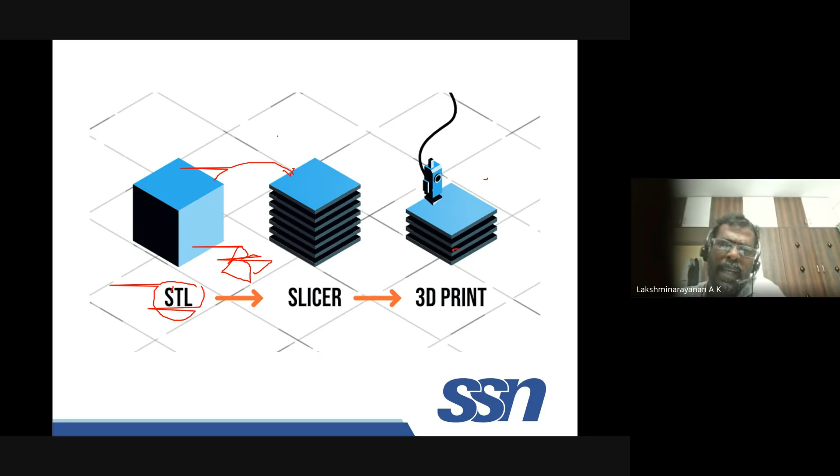Common slicer is Cura, you can use it, but wait a minute, some problem.

Each and every printer comes with its own slicer. Creality, what I use, has its own slicing software that better suits their machine. They work for that, then just feed that file as G-code. Before the slicer, this is a 3D model. After slicing, you end up with 3D G-code. Then that gets fed into the system, and it looks like this.

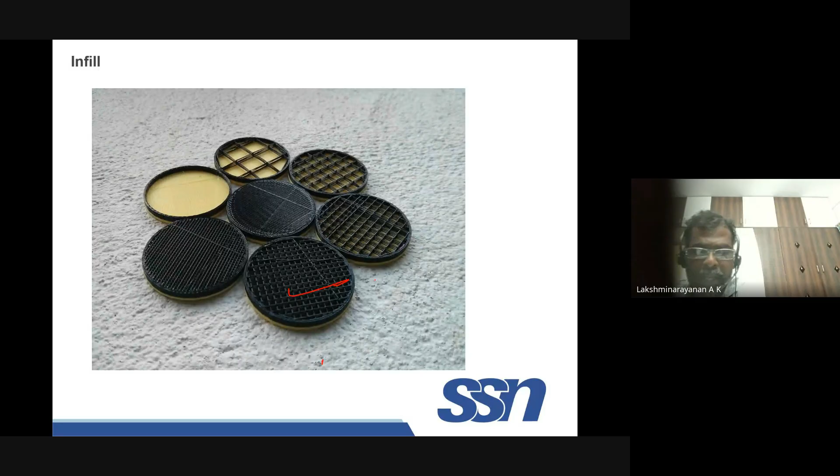This is also important: whether you need an outer shell, and what thickness you want - all these you can control. What is the fill pattern? That also plays a vital role. Fill density is one of the very important factors which decides the strength, and we can adjust that. Even 100% fill, you can fill it that much, but again the time will be higher.

These are some of the different filling geometries where mostly this is used - grid structure is commonly used. Other patterns can be used too, but the time will be different accordingly. This grid method is very, very common, which we use.

Sometimes if you want to build a structure with overhanging, you can see this is attached to the bed. Once this layer is deposited, the next layer deposits fine up to this point with no problem. But when your printer head moves into this area with nothing beneath to support it, your liquid metal or semi-solid wire coming out will just fall down. So instead, you create a support.

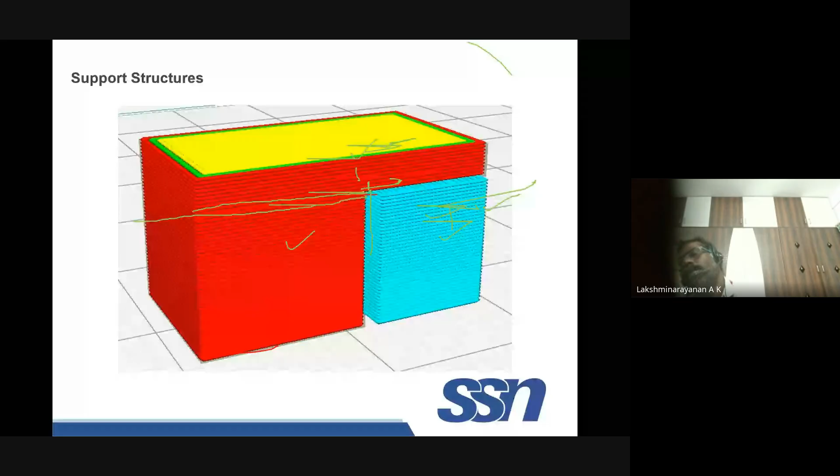This support is loosely packed, not the same density as the main part - it's a different density. You can still play with different formats or geometries for your supporting member. Once deposited, once your component is finally finished up to the top layer, you can easily remove these supporting members. That's why it's not near-net manufacturing or 100% efficient when you have support.

It depends again on the model. Same product - can I print without support? Yes, you just flip the model and do the slicing. So naturally, for any overhang, please remember this. Since you're keeping it this way, since there's overhanging, you need support. But by proper arrangement, you can still avoid support - the same product, you can just flip it and keep it up.

Keep this part at the bottom, so that this support member is not needed. So when you start, you decide whether you want to start directly with the product or give some support, because...

Such printers are available, composite printers are available. Maybe I will show a slide next time I present. I'll start with that. You can insert carbon wherever you want, in the form of chopped fiber or even wires, continuously, wherever the stress concentration area is, you can insert the carbon fiber. Machines are available, but a single machine for polymers costs around 24 lakhs.

A very simple machine - 6 professors from some US university developed the system. They have a company and they are selling it. I visited a center and learned from there. You can do that research, there is scope, you can do that.

What way is it useful to the aerospace industry? In aerospace industry, excellent opportunities are there. All these components, whatever I will talk about in the next session, are all metallic materials - if it is titanium, titanium aluminide, nickel aluminide, Inconel, all for high temperature applications, gas turbine applications - lot of applications you can use. That is the answer to that one.

How is AM used in biomedical? I showed a lot of applications. Live organ printing currently is not at that level. Now it is at an infant stage. Maybe it will take another 5 years to a decade to have such a system for the biomedical industry. That is the answer for that.

Especially wire arc additive manufacturing - you can build 3 meters. People have done it. That answers the question about the limit of dimension somebody asked.

Okay, anything else? Maybe you are all tired after 1.5 hours. You sit. Sir, please share your contact details, sir. Yeah, it is there. The last slide you can see that, no?

lakshminarayananak at ssn.edu.in.

Maybe I will come again. I will come one more session on the 28th - session 7, sir. I will cover maybe in between. Some people are coming and talking about solid state, but I will cover with respect to different materials. Whatever research you can get, you can start. All those things I will share during that session.

Okay, if no questions, I will just... somebody wants to ask something. Not for saving... by mistake, I think. Yes, yes, yes, sir. I think she is not asking any doubt.

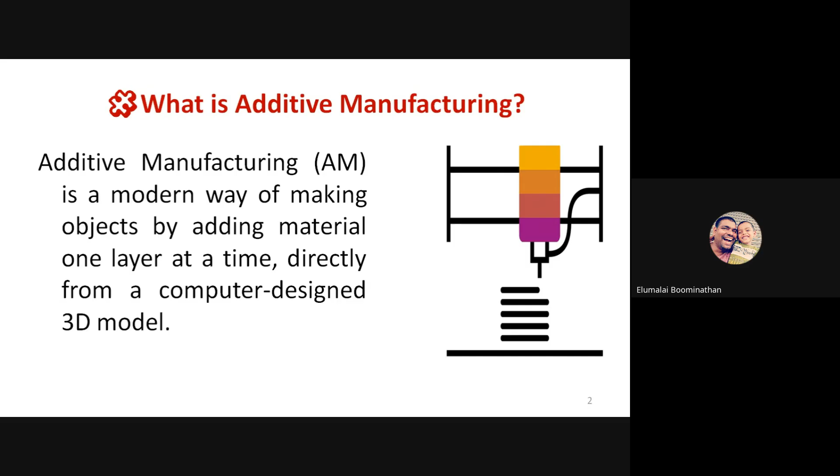We'll move on. I'm not sure this introductory part will be covered by Dr. AKL also, but I'll just go through it fast. Additive manufacturing, as we are aware, is a modern way of making objects by adding material layer by layer directly from a digital model or a CAD model.

The basic principles of additive manufacturing, in my perspective, can be put into 6 different things. Layer by layer fabrication, it's a model-driven process, you need to have a CAD model so you can play with the CAD model to get the product, and material addition, it is unlike subtractive, it is an addition process.

And toolless production, which is a fascinating thing. In a conventional production environment, you need to have specialized tools, cutting tools, molds, dies, jigs, fixtures, all those things. But here, we don't need to have any tool.

Also, it eliminates the job of process planning. When you need to have tools, you need to have a production plan, a process plan. But here, the design to manufacturing in-between process is completely eliminated, with very little bit of process planning, you need to plan the orientation, the layer thickness, all those things. But you have design flexibility, that is basic to additive manufacturing technology.

And digital to physical workflow, the entire process is digitally controlled, no need to modify a lot of factors like a conventional machining process.

The ASTM standard is the leading organization which classifies additive technologies into 7 categories based on the principle of how materials are joined together to make the product. We have VAT photopolymerization, in which a liquid monomer is converted into a solid wherever the photo interacts with the liquid, so it is a photopolymerization process.

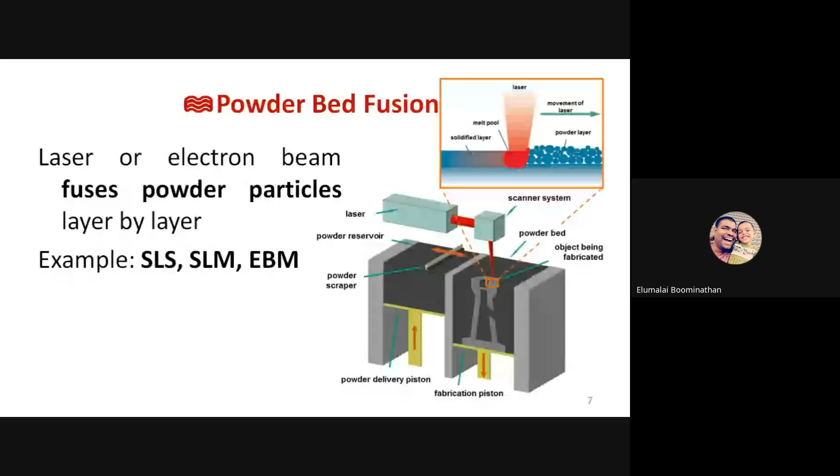Selective laser sintering comes under PBF. Basically all these processes, SLM, DMLS, LaserCUSING, DMLM, LMF, are different commercial names for the same process, which is laser powder bed fusion. There will be a slight difference in the fusion process or the material distribution, but the fundamentals remain the same. All come under laser powder bed fusion.

The SLS process was developed at the University of Texas in the 1980s, and it especially works well with polymers, metals, ceramics, and composites. The other advantage with SLS is you don't need additional support structure like stereolithography or FDM. The unsolidified powder acts as the support structure, and that's the best thing about SLS. The process doesn't require any support structure.

The schematic operation of SLS we have already discussed, but here we have three platforms. One is the powder feed system, and you have a base plate over the build platform on which the powder is deposited. Over this we have a scanning system and a laser, which is usually connected to a galvanometer that controls the fusion path.

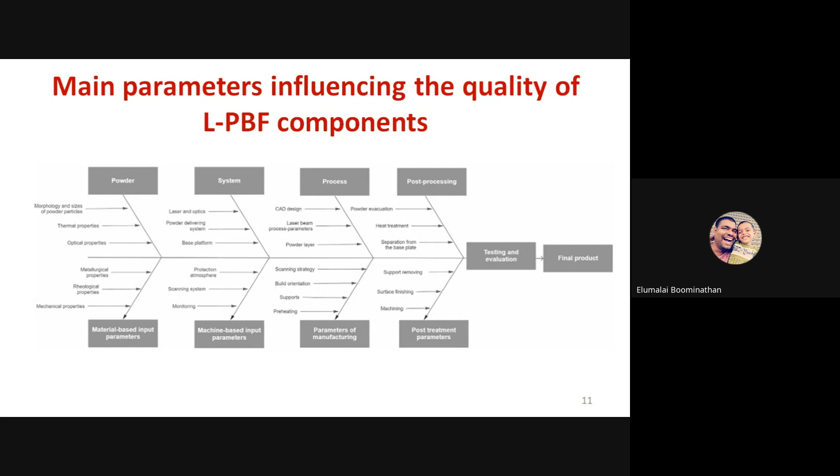Like any process, there are certain process parameters which need to be controlled to get the required quality. These parameters are usually put into four categories. One is laser related parameters like laser power, spot size, pulse duration, and pulse frequency. Then scan related parameters like scan speed, how fast the laser moves, scan spacing, hatch space, and scan pattern. Then powder related parameters like particle size, shape and distribution, powder bed density, layer thickness, and material properties of the powder used. And temperature related parameters: what temperature you maintain in the whole environment, the powder bed temperature, feeder temperature, and whether you use an inert gas environment.

In laser related parameters, laser power is the main thing. If the laser power is too low, we get lack of fusion; powders won't fuse together and particles don't bond properly. If the laser power is too high, we risk keyhole porosity, where excessive vaporization creates gas bubbles inside the layers.

About scan speed, again you have to optimize it. Too fast and the bonding is too weak; too slow and overheating occurs. Powder size also affects packing density. If the powder is very fine, packing density will be high with reduced porosity. If the powder is more coarse, packing density will be less. Powder size affects the flowability of the melt pool and the surface finish of the finished product, so optimizing the parameters reduces defects.

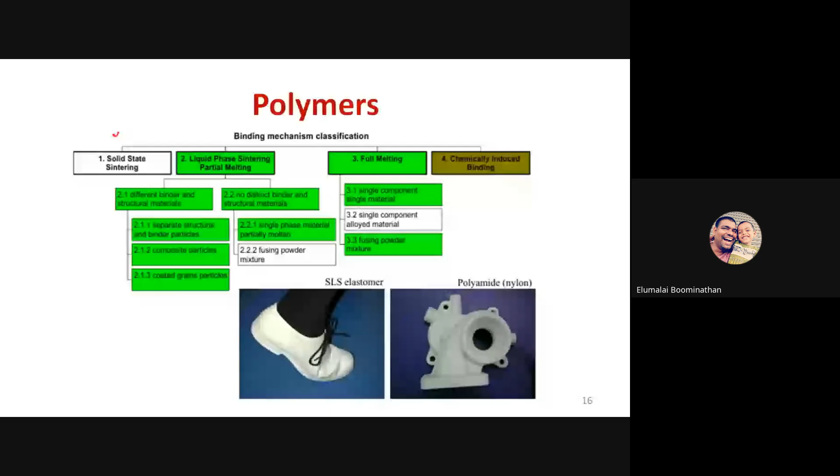In polymers, we generally use solid state sintering - the polymer powders get heated just below their melting point. We also have liquid phase sintering, where we use a polymer plus a binder; the binder gets heated, and because of the binder, the powders bind together. We also have full melting, where a single polymer is brought to a molten state and then fused together.

There are two different types of polymers generally used in SLS or PBF process - thermoplastics, which we categorize into semi-crystalline and amorphous thermoplastics. We only can use thermoplastics, with these two categories.

Though semi-crystalline polymers produce stronger parts, printing them requires maintaining the temperature precisely at that point. But with amorphous polymers, the temperature range is a bit wider.

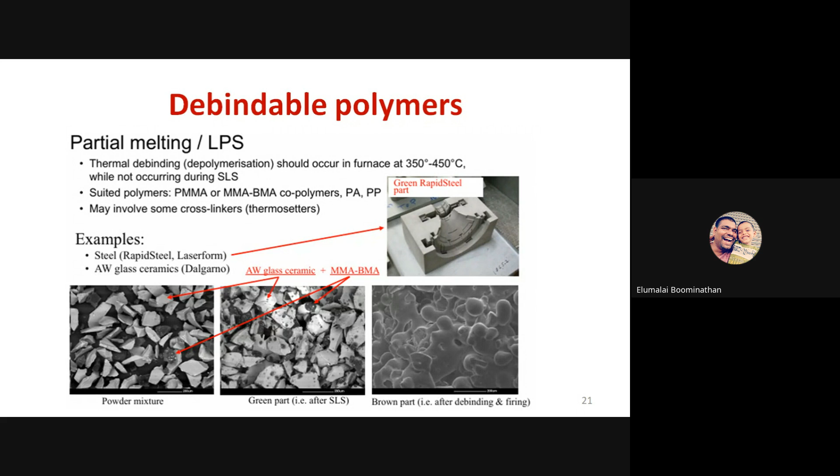Here we'll discuss debindable polymers, where the polymers are used as the binding thing, mixed with some other material, usually glass, ceramic or metal parts. They are printed together in SLS, then put inside an oven or furnace. The polymer gets melted away, and the remaining ceramic or metal becomes a solidified part.

We also have reinforced polymer powders. Usually you can have PA glass as a general thing, meaning a polyamide mixed with glass beads, and sometimes elongated glass fibers are also possible. These glass beads, sometimes aluminum beads, give better strength than simple polyamide can provide.

And elastomeric polymers that have elastic properties can also be printed in SLS. Usually in SLS, the green part is printed with a basic powder which is rigid, then polyurethane is infiltrated to get the elastic property. So this is about polymers.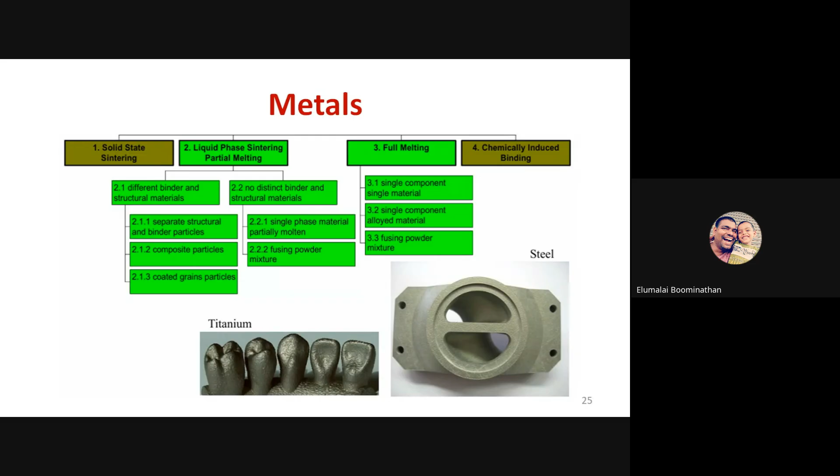Now we'll discuss metals. Again, all four fusion mechanisms are used based on the requirement. Solid state sintering is used, but usually to get a dense part with less porosity, we have to go with either LPS, partial melting, or full melting.

Sometimes LPS means you have two metals together. For example, steel plus copper, where copper has a lower melting point. It melts before steel, so the steel stays solid while the copper becomes liquid. The copper acts like a binder, and wherever it melts because of the laser heat source, we get the sintering, we get the fusion.

Also, tungsten-cobalt, tungsten-copper, these kinds of composites can use LPS or partial melting. You can see the same image: an Fe-Cu powder mixture, where Fe acts as a reinforcement like in a composite, and the copper powder makes the matrix.

You can also have full melting. If you want a pure metallic part out of the PBF process, it's melted to its melting point, then solidified. For example, pure titanium, or alloys, you can go for full melting, which gives a denser part. Porosity is an issue with all PBF processes, and full melting almost reduces the porosity.

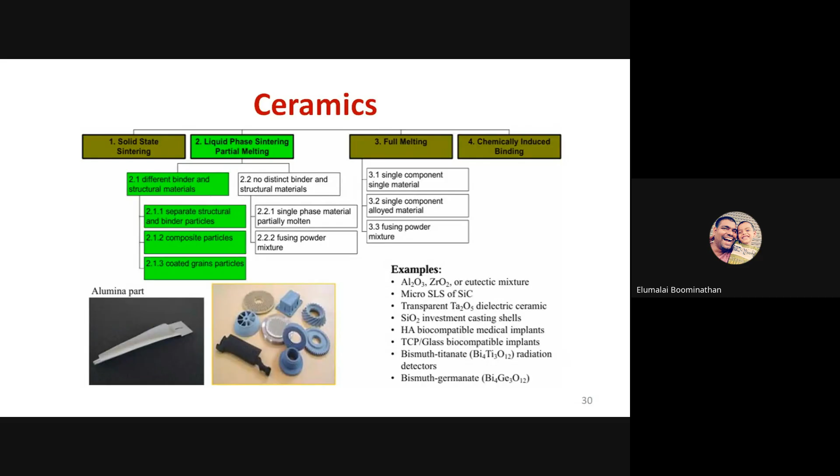So there are different approaches to print ceramics, with different consolidation types based on the ceramic. For silicate ceramics, we have liquid phase sintering, partial melting, full melting kinds of things. Oxide ceramics can be printed, and non-oxide ceramics can also be printed.

There are different approaches. One is indirect SLS, in which you don't have to completely melt the ceramic. You have ceramic plus polymer binder, and the polymer binder gets melted and binds the ceramic parts together. Once printing is done, debinding takes place inside the furnace, where the polymer gets removed and the ceramic gets compacted. But when using indirect SLS, you have to consider the reduction in all dimensions while designing the component itself.

And you can also use full melting; direct SLM can also be used for ceramics. SLS of ceramic slurry is also possible.

You can also use different types of composites. You can have polymer metal composites where a polymer matrix holds metallic particles, generally used for electrostatic shielding applications. There are also polymer ceramic composites for biomedical scaffolds, which require toughness combined with the bioactivity of ceramics, and metal ceramic composites for high temperature and highly resistant applications.

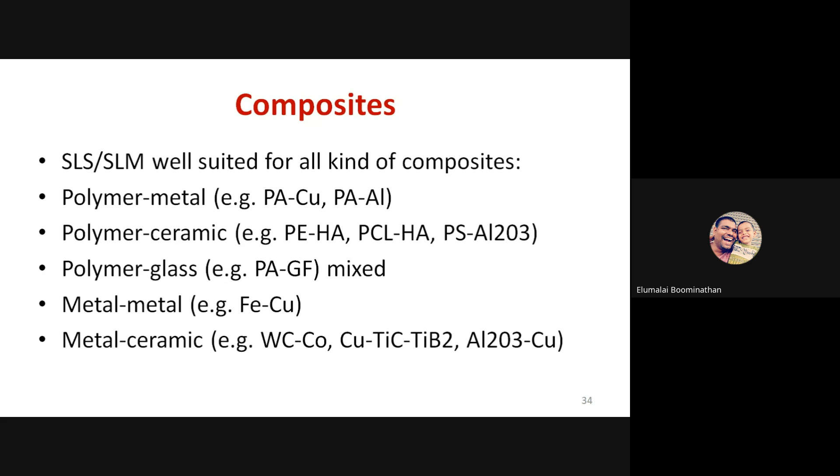So we know the advantages of composites - you can tailor-make the required product. From a sustainability perspective, composites also have great potential for reduction in weight and high lifespan, which reduces the carbon footprint and increases sustainability.

Now that we have discussed the fundamentals of the powder bed fusion process, and different mechanisms for different materials and how they are formed, we will discuss the basic physics of the powder bed fusion process. The heart of the process is the melt pool.

It's a small region where the laser interacts with the powder. The melt pool is only tens of microns in size, but it determines the properties of the final part. You need to understand how energy is transferred from the laser to the powder, how it's converted to liquid, how the liquid reacts to the energy, how solidification takes place, and how energy is transferred back to the environment while solidifying via thermal radiation and different mediums.

Then we need to understand the gas phase flow in the fusion process. When the laser hits the powder particle, not only does the powder get melted, but sometimes the molten metal induces a gas flow from the molten pool. This needs to be understood to control the process.

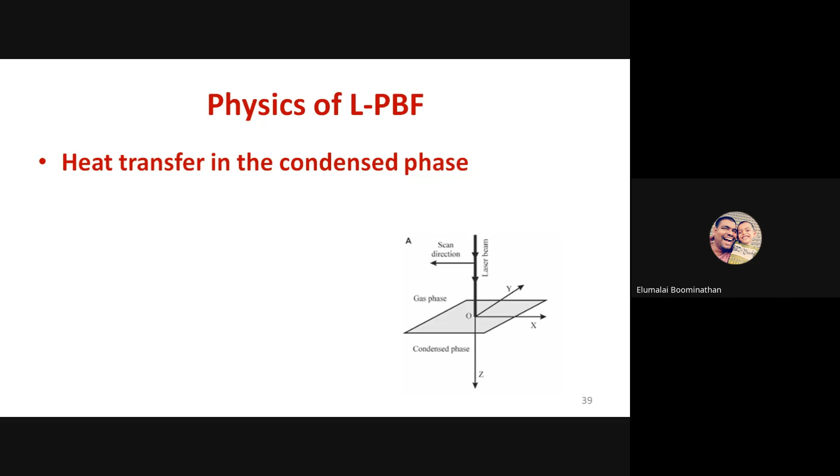And the process stability - you need to control the layer thickness, the scanning speed, the laser power, laser pulse, and laser width, all those things to get the process stable.

And again, the thermomechanics - while heating, the molten metal has different stresses. When the powder gets melted and then solidified, the concentration of thermal stress, combined tension and compression stress, makes the part weak. So we need to relieve the stress.

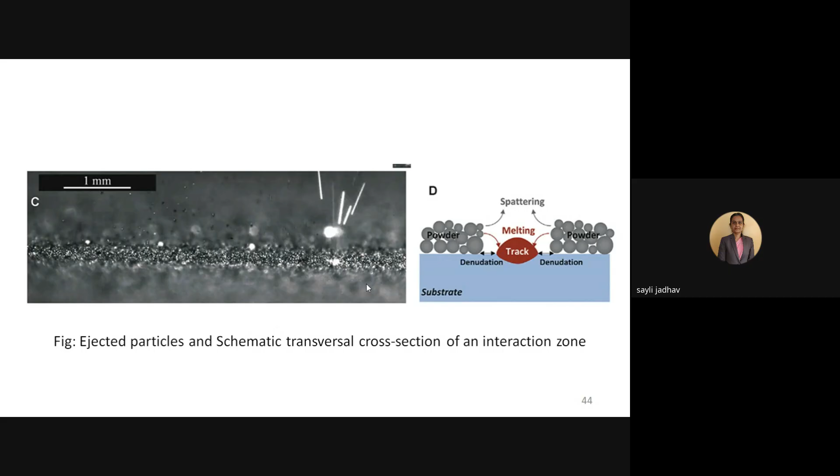So those things need to be considered.

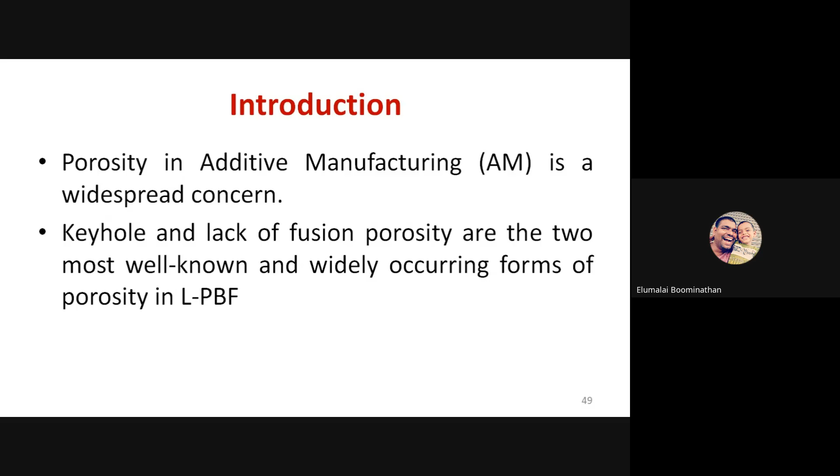Porosity reduction can be done in two ways. One is better parameter control, which directly improves quality. You also need a good post-processing setup, so that after printing you reduce the porosity component. The interaction of different hatch tracks also sometimes causes porosity.

These defects are unavoidable in the SLS process, so you should have proper porosity mitigation strategies. As I said earlier, you have to optimize laser power and scan speed to achieve stable melt pools, and preheat the powder so it has a base temperature. Preheating is sometimes necessary to get the appropriate thermal gradient, and you need to use smaller, more uniform, spherical powder.

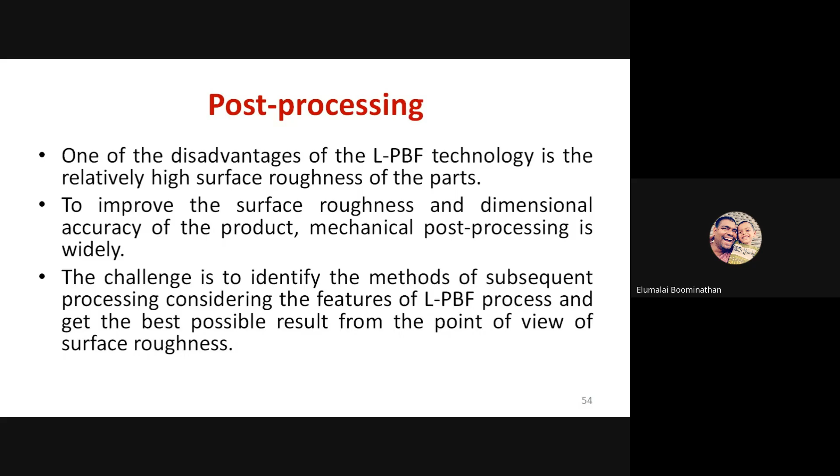These processes improve surface roughness and dimensional accuracy. Mechanical post-processing is generally used, but you need to identify the exact post-processing to get the required surface finish, accuracy, and desired microstructure to reduce porosity. There are usually three or four types of surface treatments used.

We can have mechanical surface treatments, such as sandblasting or bead blasting, where fine particles are blasted against the surface to remove loose powder and surface roughness. Grinding and machining can also be used. These methods are effective, but they generate waste, because sandblasting uses abrasives that consume energy and produce dust pollution.

You can also use chemical or electrochemical surface finishing. In electrochemical polishing, the part is submerged in an electrolyte and electrical current is applied. This is commonly used for stainless steel and medical implants, because they require a high degree of surface finish and need to be corrosion resistant. So electrochemical polishing is usually used for biomedical applications.

You can also have laser based surface processing. Laser polishing uses a low power laser that melts the top layer or top surface, and the molten layer re-solidifies. Sometimes it smooths out the peaks and valleys, which creates a uniform surface.

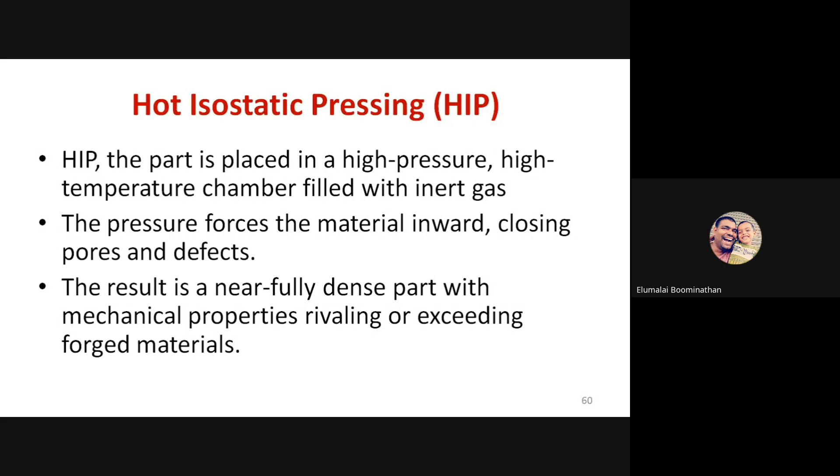Now we'll discuss a few industrial applications. In aerospace, it is one of the earliest and strongest adopters of SLS and metal additive technologies. As we know, weight is everything in aerospace. Every ounce or gram of reduced weight saves thousands of liters of fuel. So not only is there an economic perspective, but also a massive reduction in carbon emissions. Every kilogram reduction in weight in aircraft or space vehicles reduces the carbon footprint also.

You can see the famous example of General Electric's LEAP engine nozzle. This LEAP nozzle was made out of 20 separate components that had to be assembled together, but with SLS they were able to produce it as a single lightweight optimized part, with a 25% weight reduction. You can find this LEAP example through Google. Airbus also used various SLS brackets, cabin components, and structural fittings. NASA also tested AM-based rocket engine injectors. So the aerospace industry is an adopter of SLS technology in a massive way.

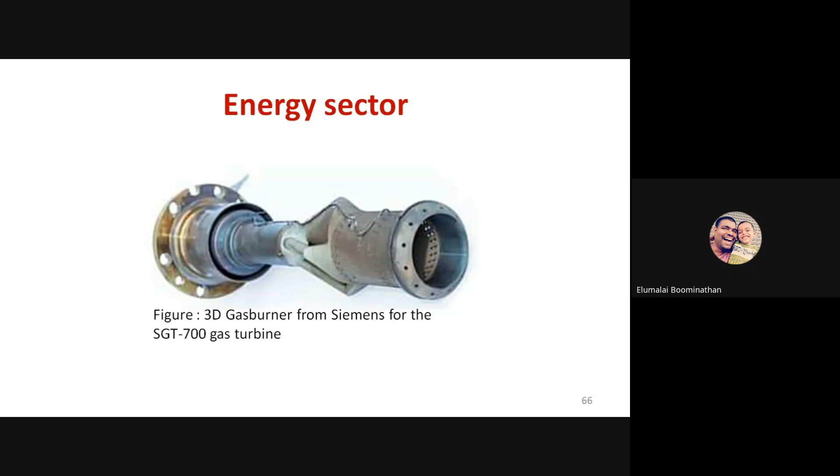SLS is also used in various automotive industries, where lightweight, customized components are required, and rapid prototyping is used to reduce the design cycle time. In the energy sector, SLS is used to produce turbine burners, heat exchangers, and other high performance components. Siemens used SLS to print gas turbine burners.

We also have medical applications in SLS. We know every patient is different, and SLS allows customized implants and devices to be manufactured to each individual's anatomy. Titanium bone implants, dental bridges, and cranial plates are usually designed from CT scans and printed for exact fit. Beyond implants, polymers like nylon and TPU are also used in surgical guides. Prosthetics are also printed in SLS.

You can see other applications like consumer products, lifestyle applications, architecture and construction, and defense and military applications. These are the different applications of SLS. Industrial tooling and jigs are also produced using the SLS process.

Now we'll move on to sustainability and the environmental impact of the SLS process.

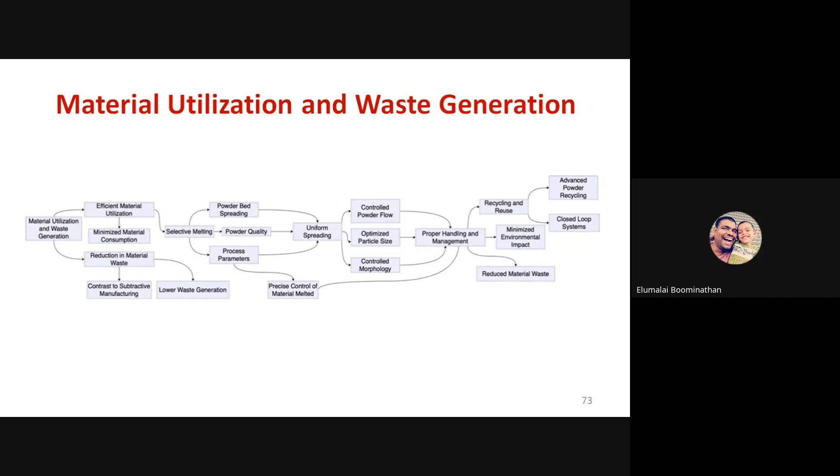Next we discuss energy efficiency in SLS. One of the main criticisms of SLS is its energy consumption, since lasers and heated powder beds require significant amounts of power. However, when we evaluate sustainability, we must look at the entire life cycle. A part that consumes more energy during production may save far more during use.

For example, take a lightweight aircraft component produced via SLS, which may consume more electricity while printing than it consumes when producing the same component via machining. But over years of service, the reduced fuel compensates for the energy spent during printing. So if you conduct an overall life cycle analysis of SLS components, you can see the energy efficiency is high in SLS compared with conventional machining process.

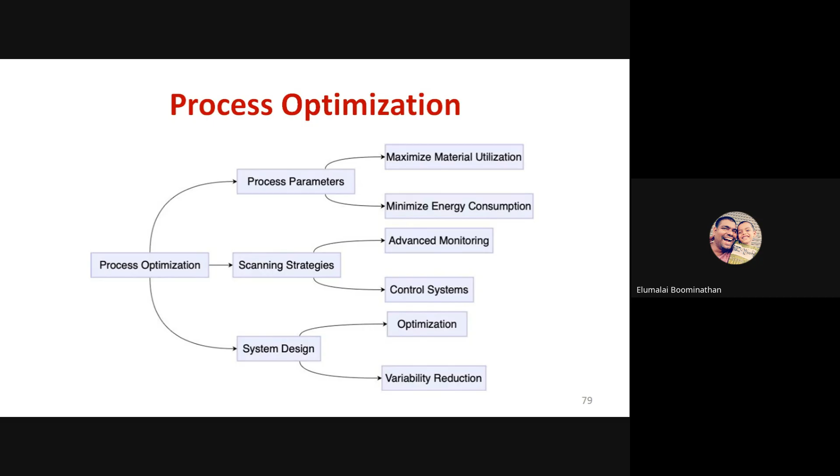And how you're going to handle your waste. Waste in the sense, sometimes after some cycles you cannot reuse the powder, so that unused powder becomes waste. How are you going to use it? How are you going to recycle it? Sometimes you have some flawed or fractured components. How are you going to recycle them? Whether you convert that powder again and print it, or dispose of it. Waste management has to be considered from the sustainable as well as the environmental perspective.

When you think about sustainability and environment, this is quite straightforward. You have to integrate renewable energy into the SLS process.

I think we are at 9:17. Okay, we'll go fast. Design for sustainability.

So you have to design lightweight. Part consolidation is a very good strategy in which you print multiple parts in a single setup. Material efficiency while orienting without support structures, different orientations to get optimal material usage, will sometimes give you more reusable powders.

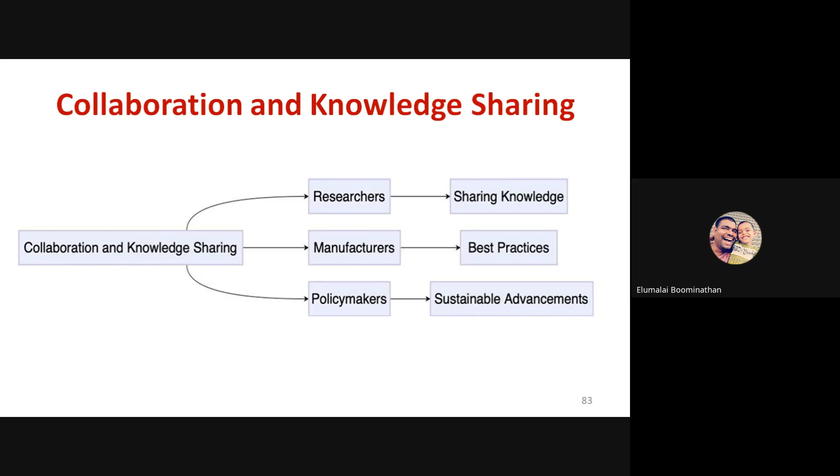So far we have discussed the basics of the SLS process and powder bed fusion technology altogether, different materials that can be printed in SLS, different fusion mechanisms used in SLS and other powder bed fusion technologies, the physics behind powder bed fusion, how powder is converted into solid, and how multiple dynamics should be considered. All those things we have discussed.

I will move on to possible trends in the future, or emerging trends, from the perspective of sustainability. Recent SLS printers will have multi-laser and high-speed systems.

So instead of a single laser scanning a layer one hatch at a time, you can have multiple lasers. The new systems will have multiple lasers and high-speed scanners, and you can also integrate AI and real-time monitoring into the process so that you can monitor the printing process in real time.

And bio-based polymers are reducing fossil-based feedstocks. So bio-based polymers can also have a reduced carbon footprint, reduced environmental impact, and a closed loop recycling system, so you can continuously use the unused powder. These strategies are under the research stage.